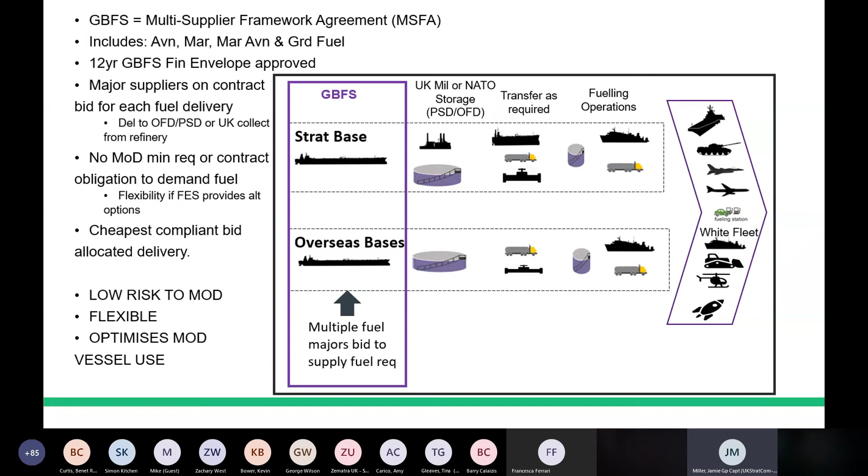If we switch to the next slide, many of you will remember the Defence Fuels Group and its disbandment around 2011-12. And on from that, we had the Defence Food and Fuel Services, of which I was a part as well many years ago. And then the realisation that really didn't work, in the sense of having a centralised place for fuels policy, governance and adherence.

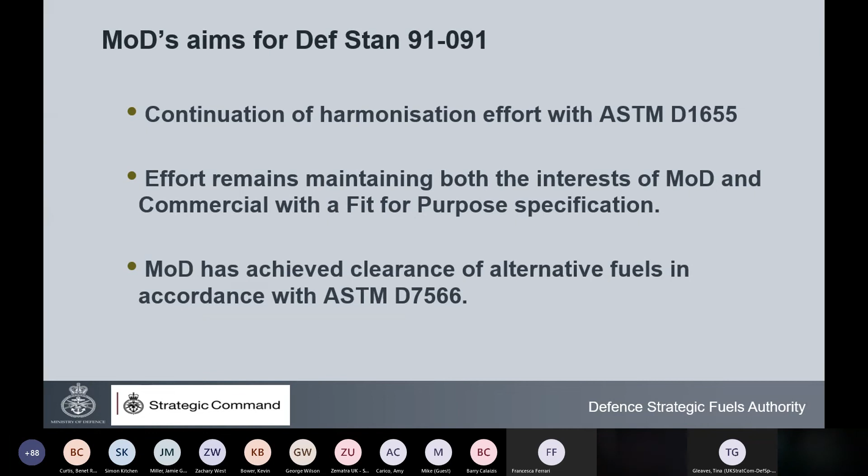Next slide, please, Francesca. The current status is issue 12 was published internally 14th of September and externally 18th of September, and this includes a 3-month implementation period. It's available on the DSTAN website, which you need to go through the Defence Gateway to get, but I know they've been having issues and people haven't been able to get hold of it. If you have problems, just email me and I'll quite happily send you a copy. Next slide, please.

As I've already mentioned, our biggest achievement is the clearance of alternative fuel blends, and so that's necessitated the removal of Annex B1, which restricted the supply to MoD. In line with this achievement, the global bulk fuel supply contract is in progress at the moment. It's to be awarded this month. Notice of award was issued 7th of October. There's a 10-day standstill period, so the award contract will be made on the 19th to the 21st of October, and this is subject to internal approvals. Next slide, please.

The particle counting limits have been added to table 1, and this has been added as an alternative method to gravimetric, so either can be done. Next slide, please.

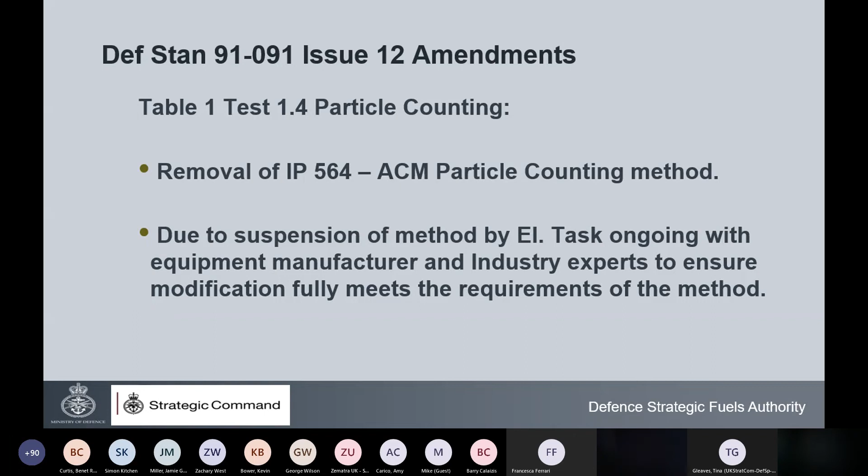In conjunction with the particle counting limits, we've removed IP 564 ACM particle counting method, and that was due to the suspension of the method by the EI. There is a task with the equipment manufacturer and industry experts to ensure that the modification fully meets the requirements of the method. So potentially that can be reinstated in issue 13. Next slide, please.

To do with particle counting, we've inserted a guidance note for test results that exceed the limits and for unsatisfactory results in the presence of water. We've also inserted this note into Annex E, Table 5, Note 1. Next slide, please.

Going on to a different subject apart from particle counting, the ASTM D3241 aromatic dye issue. Table 1, Note 5 has been amended to read that batch numbers greater than 983 are suitable for use and yield comparable results with batches prior to 975.

Next slide, please. The other minor amendments are Annex A 2.6 antioxidants, so the reporting requirements have been simplified. Annex B 4.1 co-processing, minor rewording to align with ASTM D1655. Annex C 4.1 FAME carryover statement, minor rewording. Next slide, please.

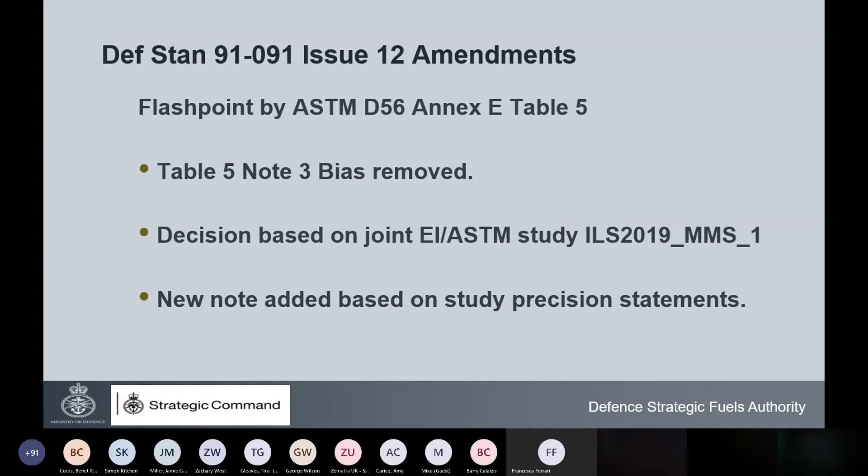Flashpoint ASTM D56, this is the Flashpoint method with the bias. Annex E Table 5, due to the joint EI/ASTM study ILS 2019_MMS_1, due to the outcome of that and the study precision statements, the bias note has been removed. Next slide, please.

Annex F, additional information on fuel properties. F 1.2, this has been enhanced to acknowledge that fuel storage and distribution can unintentionally accumulate elevated levels of particulate. Therefore, additional handling procedures such as extended settling and filtration will be required prior to the point of delivery to the aircraft. Next slide, please.

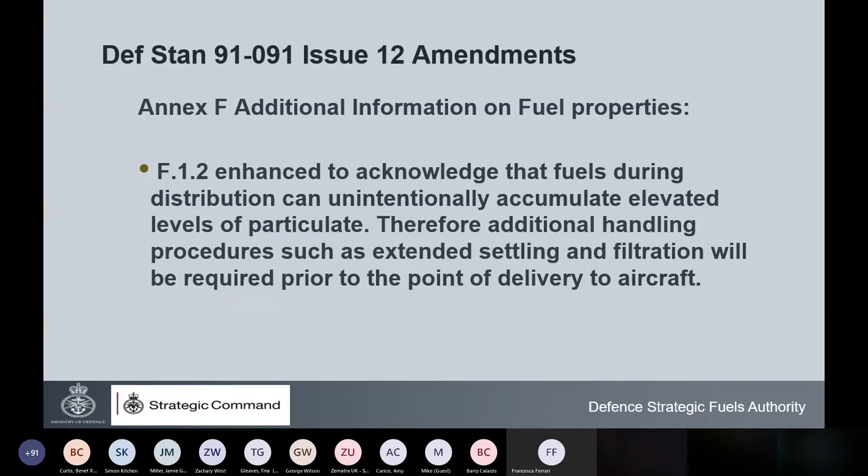Annex F, which is F.4, Saybolt color. There's been a minor change in that to read F4.2, changes in Saybolt color amended to reduction in color, in both the test and the chart on that section.

Next slide, please. So looking ahead to draft issue 13 proposals, conductivity SDA has been raised. Is it safe or reasonable to reduce the minimum requirement down to 25?

Thermal stability automatic tube raters, should there be a referee method? There's a lot of activity on this at the moment with ASTM and the task force, so we're all waiting for the outcome of that. Water separation test methods: there are two new ones up for consideration for inclusion in issue 13, ASTM D7224 MSEP and ASTM D8073 WSI.

We've also been in conversation with the manufacturer of Tolad 351 lubricity additive. That's no longer supported by them, and so they've registered it to become obsolete.

Next slide, please. So we're inviting questions and comments for amendments to issue 13. If you've got any, please feel free to submit them to me and I can take them through Exco.

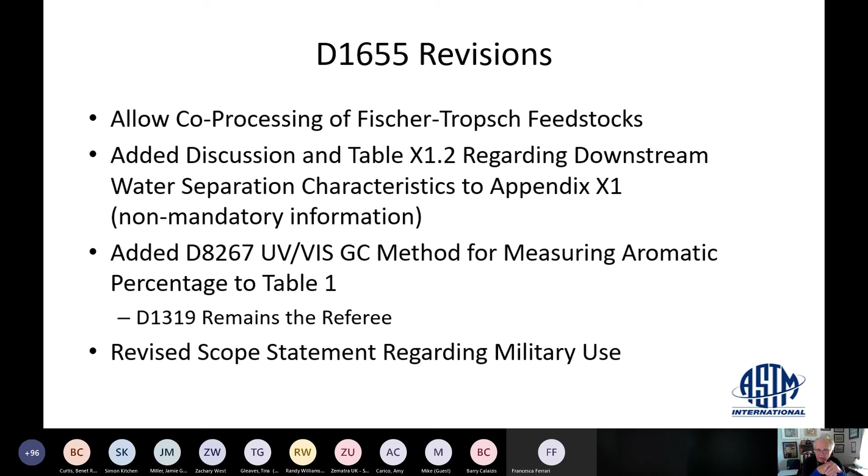Francesca, next slide, please. Oh, no, I'm sorry, go back. I was looking at my page, sorry. I've got one to my side so I can see from my right eye because I'm right-eyed.

Now the next slide, please. Thank you, Francesca.

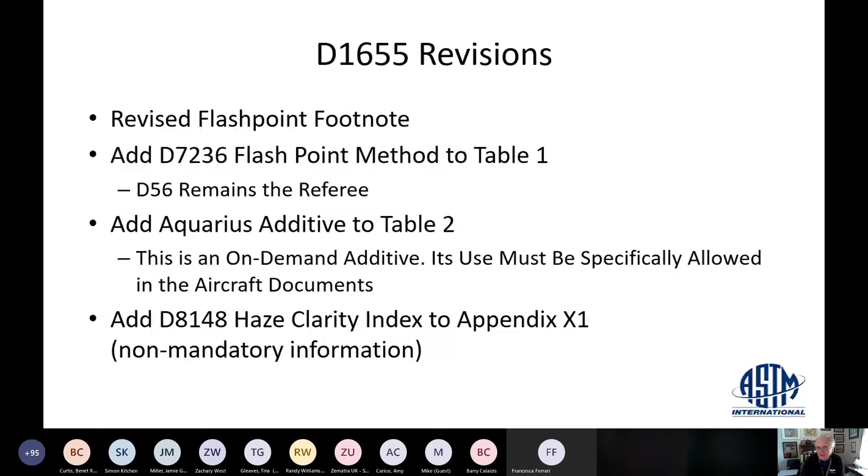Other things that are going on: Section 2 of gasoline diesel reciprocating engines continues working on unleaded gasoline standards. I think progress has probably been delayed a little bit because of the aviation recession this year, but I know they keep working on it.

Thermal stability and combustion characteristics: there's continued progress on updating D3241. Probably the biggest, most dramatic change is that gear pump JFTOTs are no longer allowed in the standard, either in 3241, and by extension they're not allowed in 1655 either.

A coordinated effort with EI will result in a revised IP 323, and you can talk to Gary Ricard about how that's going to come around.

On additives and electrical characteristics, there's continued work on revising D4054 to make it clear how the process works.

In section 5 on fuel cleanliness, through a concerted industry effort we were able to get D5452 revised and keep it from falling off the edge at the end of the year. The final draft is in progress right now, and we expect it to be published shortly as 5452-20.

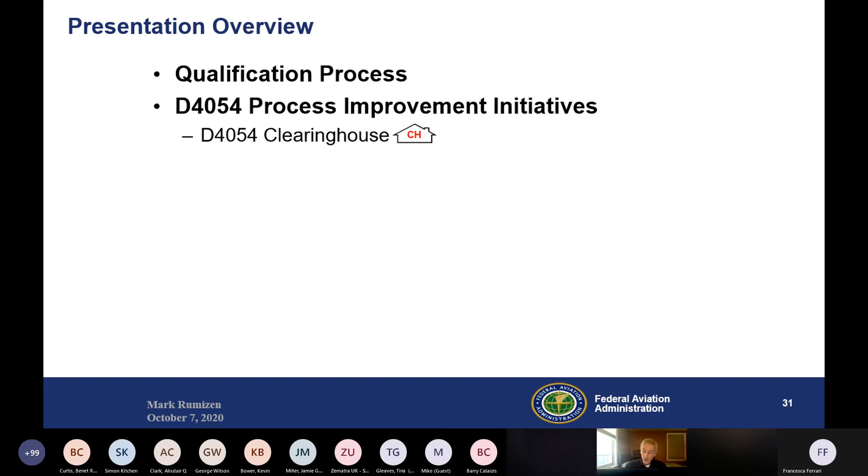Thank you, Mike. Good afternoon, everybody. Good morning. Hopefully I'll get through this in a reasonable amount of time; for some reason the animation always seems to take longer than I anticipate. But I'm going to give an overview of what we're doing relative to alternative jet fuels and ASTM. I'm going to give an overview of the qualification process, followed by talking about a couple of D4054 process improvement initiatives, the clearinghouse — and that's the icon that's going to go with the clearinghouse, keep your eye on that and remember it — and the Fast Track Annex, with its own icon.

And then talk about alternative jet fuel pre-screening, which is something new. And finally, talking about the National Jet Fuel Combustion Program, integration into D4054. And then I'm going to provide a status of the pathways that are in process and those that have been approved.

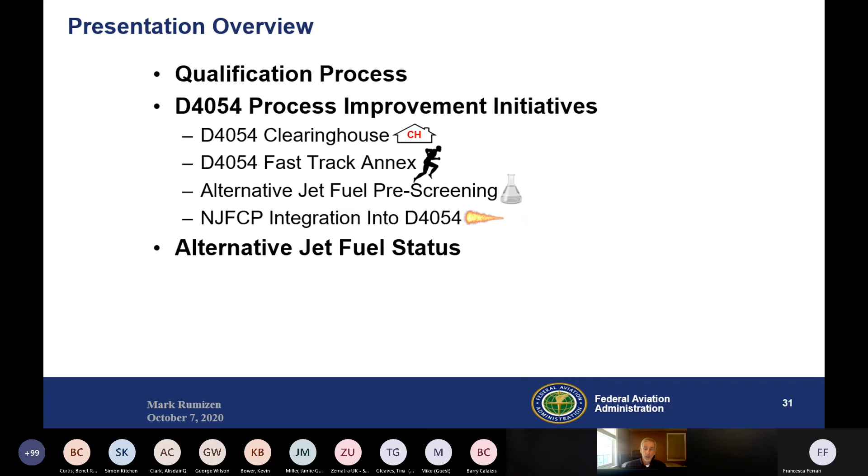So this is a one-chart overview of the whole process we undertake through ASTM to approve for use alternative jet fuels in basically virtually all aircraft. It's based on the fact that virtually all aircraft are required under airworthiness regulations to establish an operating limitation for jet fuel or aviation fuel. And virtually all aircraft define Jet A and Jet A1 as the fuel they need to use, typically defined in terms of specifications, ASTM D1655 or DEFSTAN 91091.

And at ASTM, we developed a guide or practice, D4054, to basically compare a candidate alternative jet fuel with conventional jet fuel made from petroleum. And if the result of this comparison is that the new alternative jet fuel has the same performance and properties as conventional jet fuel, we balloted at ASTM and added it to our drop-in fuel spec, which is D7566.

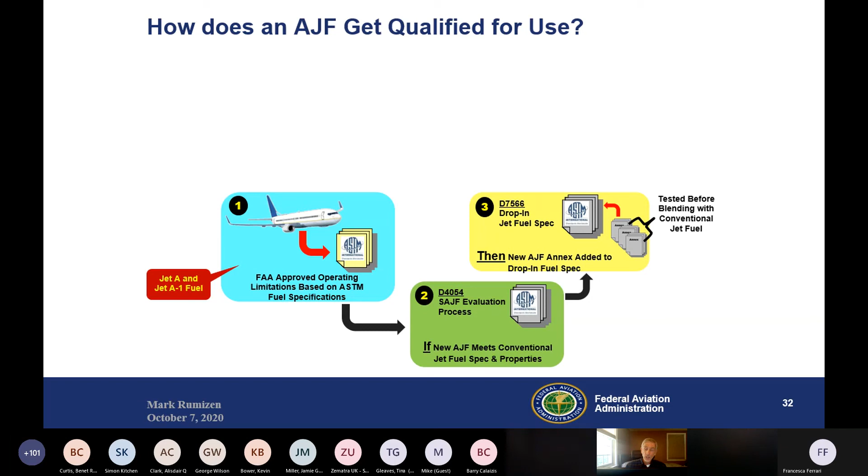Each of the alternative jet fuels is added as an annex. That's the way we've been doing it. The reason for that is they all have to be blended with some percentage of conventional jet fuel, between 50 and 90%, to have a complete, what we'd call sustainable aviation fuel. So it's not 100% sustainable, it would be some percentage sustainable.

And so it's only a drop-in fuel after blending. That's an important point. So the final step is that because all these fuels that we've added to D7566 are drop-in fuels, they are essentially equivalent or identical to petroleum-derived jet fuel. So because of that, we can conclude that the new alternative jet fuels meet the existing operating limitations for Jet A and Jet A1, so they can be used without any regulatory approval.

So the ASTM process, in effect, is a process to show that the new alternative jet fuel is the same as the existing fuel. It's the same fuel, it's not a different fuel. And what that means is that having the alternative jet fuel added to an ASTM specification equals approval to fly.

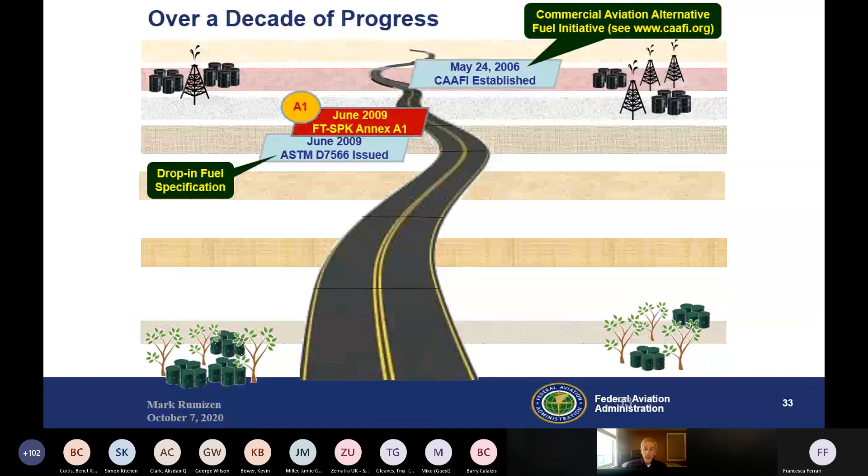So I'm going to go through this chart quickly. We started all this back in 2006 with CAAFI, the Commercial Aviation Alternative Fuel Initiative. You should go see that website, we have a ton of information on what's going on with alternative jet fuels and sustainable aviation fuels. And we issued the drop-in fuel spec in 2009. The first annex was included with that spec, Annex A1, and that was Fischer-Tropsch.

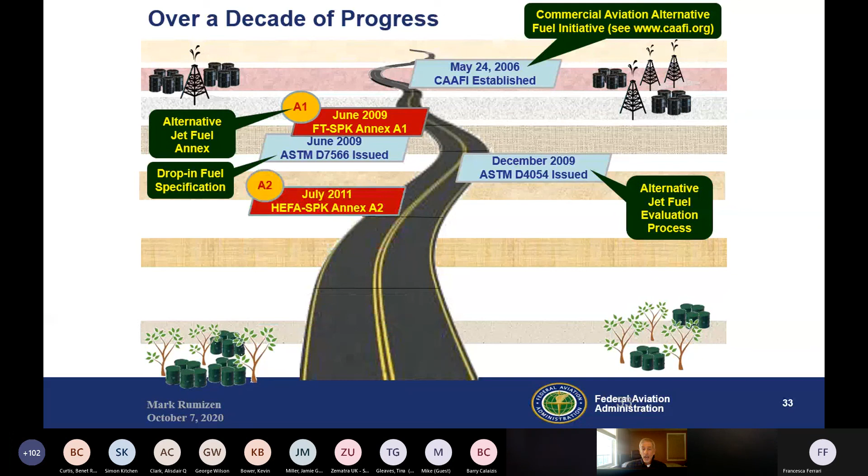Our evaluation process or qualification process, D4054, was issued the same year, 2009. And since that time, we've progressively added additional annexes to the drop-in fuel spec, D7566. So there's been a regular progression. Annex A5 was initially approved just with isobutanol as a feedstock for alcohol to jet. Two years later, we added ethanol as a feedstock. And more recently, just this past December, we added CHJ, catalytic hydrothermolysis jet, as Annex A6.

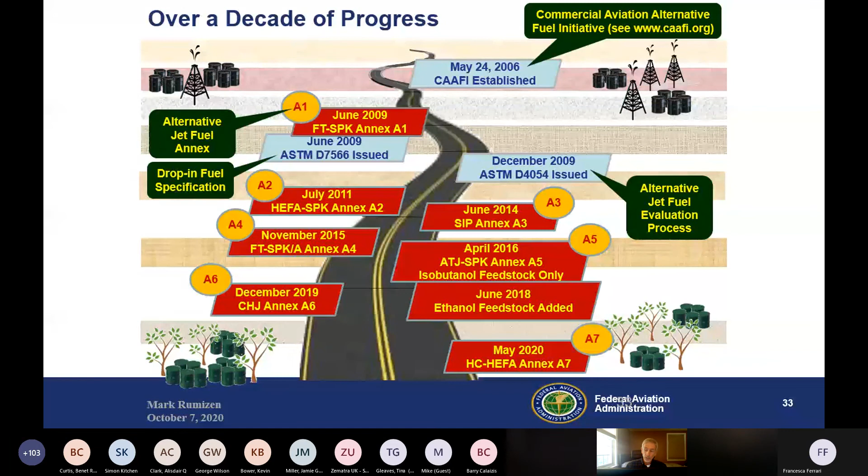And then we added a version of HEFA that includes hydrocarbons along with triglycerides or lipids as part of the feedstock. That was Annex A7, added in May. So again, you can see a regular progression over the last 14 years, and when we get later in the presentation, I'll show you — hopefully we can keep this going.

The first process improvement I'm going to talk about is the clearinghouse. Effectively, this is one-stop shopping, that's the idea. When we started evaluating these fuels at ASTM, the new fuel producer was faced with running around ASTM meetings, grabbing as many people as they could and asking how to test things, where to test things. So we tried to consolidate everything under FAA funding in this clearinghouse.

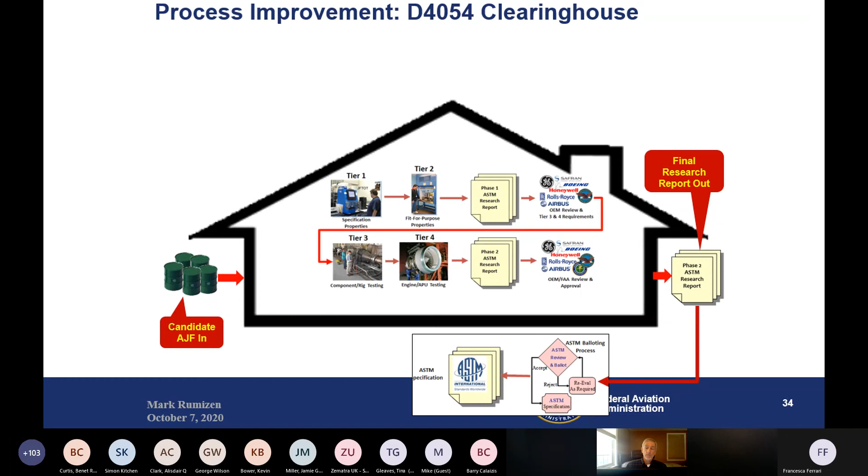So the idea is that a candidate alternative jet fuel producer would provide a certain amount of fuel, 100 gallons is what we look for initially, to the clearinghouse. The clearinghouse would do all the work in terms of coordinating the testing, funding a lot of it, not necessarily all of it, and coordinate the reviews with the OEMs and the FAA. When all that's done, a research report would come out that's ready for ASTM balloting. So the clearinghouse is run out of the University of Dayton Research Institute, UDRI.

Zabarnick is the guy you should contact if you want to get information on how to get started on the process.

The FAA is funding it under a Center of Excellence program we have called ASCENT. That means we fund 50% of all the activity, so it's under a cost share, and industry has to fund the other 50%. But because it costs so much to develop these fuels, meeting the cost share typically isn't a challenge. Ideally, other entities with a real interest in improving these alternative jet fuels, for example to meet carbon emission goals, could contribute to the clearinghouse to help facilitate the evaluation and approval of these fuels.

That's the icon, the little house with the CH in it, so keep your eye on it. I'll use it later on.

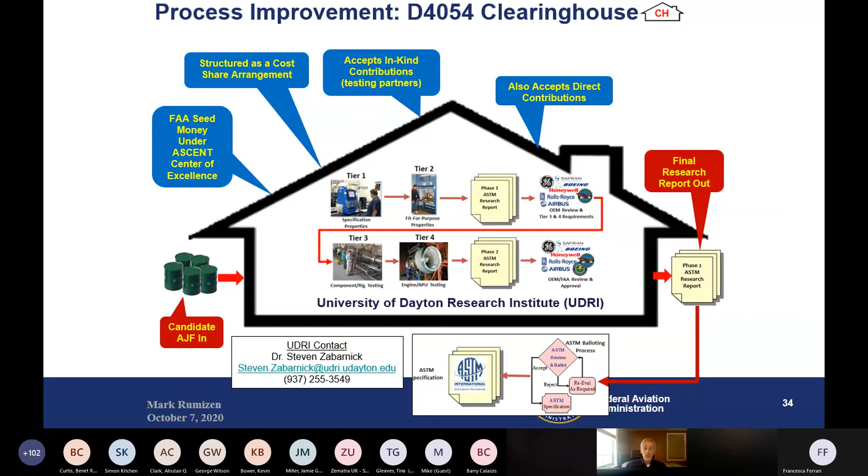D4054 Fast Track is basically an accelerated, light testing program that under certain circumstances we allow fuels to go through. It's pretty much fuel property testing along with in-depth fuel compositional analysis that's primarily the only thing we require under the fast track. And you only go through one review process with the OEMs, not two phases.

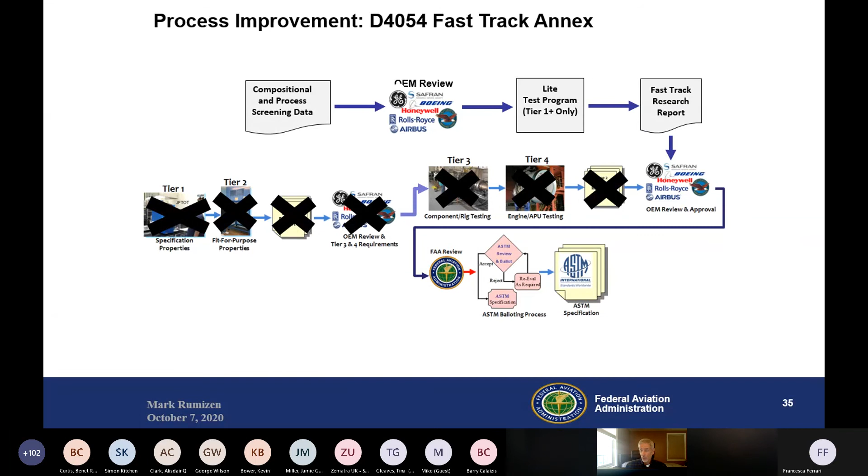However, in order to use the fast track, two conditions have to be met. First, it's only for alternative jet fuels with hydrocarbon compositions that look very much like a conventional jet fuel. That means a well-distributed hydrocarbon distribution between C8 and C16, with other target values in the fast track annex in D4054 indicating what we consider conventional. Another way to look at it is that it's a much more narrowly defined alternative jet fuel, one we want dead center, not on the outlier of the properties or composition of conventional jet fuel, very closely defined.

Also, once a fuel is approved under this process, it's only limited to a 10% blend percentage, regardless of the physical properties. You may be able to blend it to a higher percentage, but because we approved it under this light testing program, we're limited to 10% blend concentration.

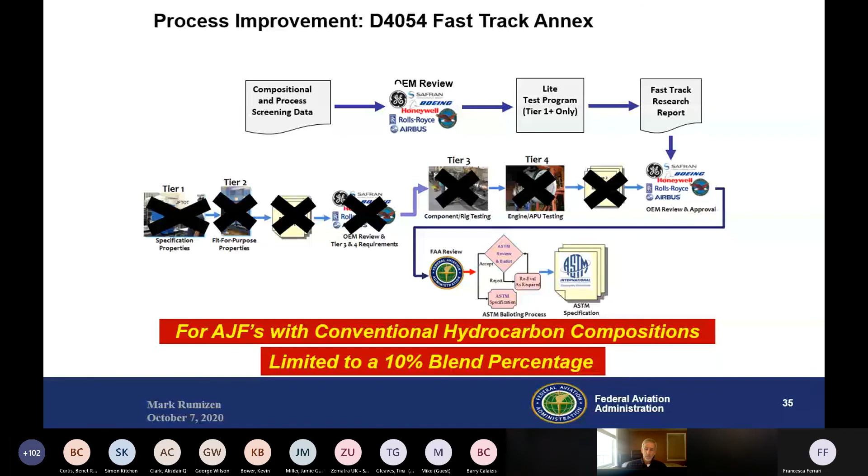And that's the icon for the fast track annex.

The next process improvement initiative we've just started introducing is called pre-screening. The D4054 process I just went over, that bracket, should encompass the whole graphic on the bottom. It was intended for candidate fuel producers who'd gone through the experimental phase, locked in their conversion pathway and composition, and are ready to come to ASTM.

They're ready to scale it up, maybe from pilot scale to demo scale, to make enough fuel to support the ASTM evaluation. We coordinate that through our CAAFI Cert-Qual team, which I lead. So it's a more mature candidate fuel when it's ready for D4054.

We looked at it and thought there needs to be some guidance to candidate fuel producers earlier in the process, when they're dealing with lab scale experimentation, to help them refine their catalyst and conversion process to result in a final composition or fuel properties that's going to make it easier and more conducive to getting through the D4054 process.

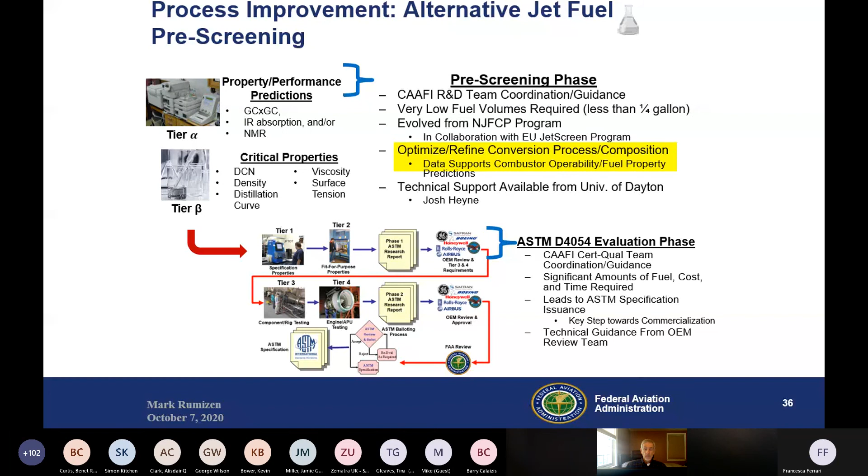And that's the icon for the process improvement.

National Jet Fuel Combustion Program was started back in 2014 or 2015. The idea was to study the impact that different fuel compositions have on combustor operability.

The reason for that is, as you can see in the graphic, Tier 3 and Tier 4 testing, where you might go through combustor rig testing and/or engine testing, maybe even flight testing, involves spending a lot of money making a lot of fuel to support that. So if there's a shift in the composition of the alternative jet fuel from what we consider typical petroleum-derived, conventional jet fuel, the OEMs are going to want to see testing on combustor rigs and engines to make sure there's nothing unusual relative to combustor operability.

Under the National Jet Fuel Combustion Program, a referee rig was developed that requires less fuel, combined with a few other tests, shock tube and spray rig. The idea is that you can spend less money, use less fuel, and verify there are no concerns with combustor operability. So we're trying this out with one company right now going through D4054. They're also going to conduct some of the National Jet Fuel Combustion Program tests, the referee testing and other testing.

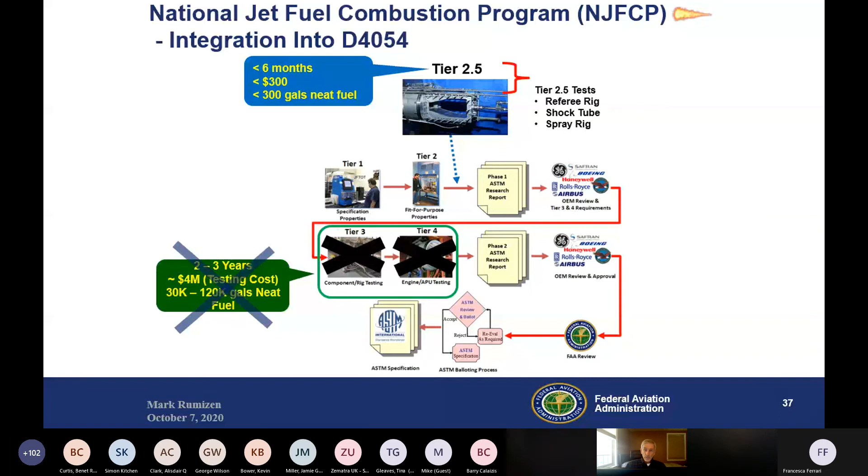And there it is, there's the icon for the National Jet Fuel Combustion Program. Getting to the final slide, here's the status. So the D4054 process in this chart starts on the left side, goes to the middle, then jumps up to the top, goes across to the right side of the slide, and then drops down to the final ASTM balloting and issuance of annexes in D7566.

So with this status, we're going to work backwards. Here are the 7 annexes that have been approved and have gone through this whole entire process.

Right now, Virent synthesized aromatic kerosene, a purely aromatic stream, has gone through phase 1 and done some Tier 3 and Tier 4 testing. The data is being put into another report. Virent went through some corporate reorganizations, it's now been purchased by another company again, so they're going through corporate reorganization. There's been a couple of reasons why things have slowed down, along with the pandemic, which pretty much slowed everything down. But they're still considered active with SAK.

Green diesel, which we're calling HFP HEFA, high freeze point HEFA, and Shell IH squared, have produced research reports, and with HFP HEFA, the OEMs are currently reviewing that research report. We decided to give the OEMs more time to review it because of the pandemic. That was very nice of us, and the OEMs were very appreciative. But they're currently reviewing HFP HEFA.

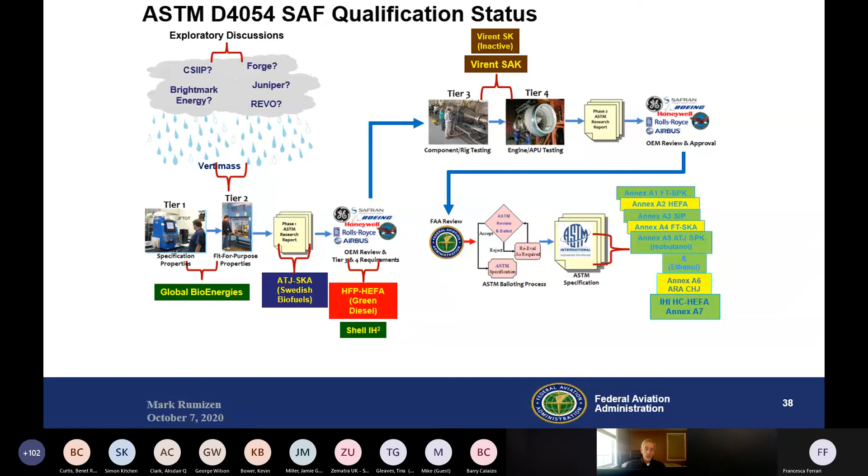So for the exploratory fuels, Vertimass is almost ready to do Tier 1 testing. And you'll see the icons on the process improvements, we're actually implementing those with the companies that are working on testing, where you see several companies taking advantage of the Clearinghouse. IHI took advantage of Fast Track.

And newer companies will take advantage of pre-screening. And that concludes my presentation. Thank you for listening. I'm sorry it took a little longer than it should have.

So this chart speaks for itself. I don't really have to say anything. It's grim. If you look back, if anyone was working in aviation or financial markets in 2009, you'll remember that. That wasn't a great time.

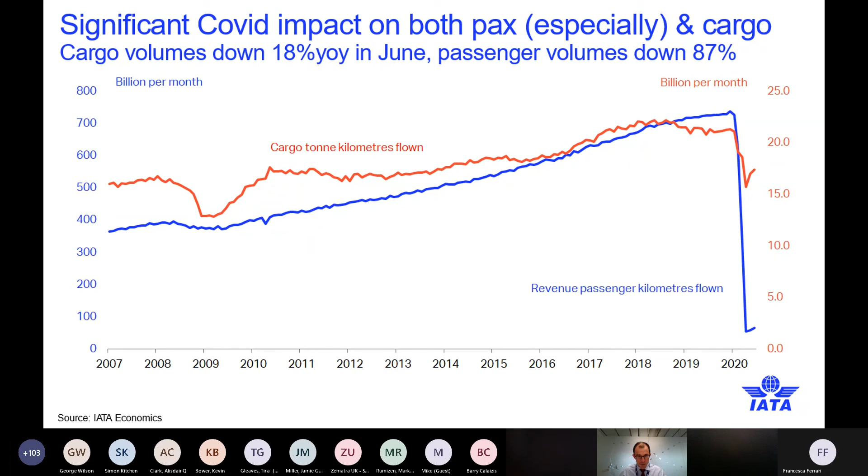But the 2020 cliff there, so we know that it's not good. And perhaps what's interesting to think about is, well, what does the recovery look like? And this does have some policy implications, which is partly why I show this. And different to some previous shocks that the industry has had, where often we see more of an aggressive V recovery, we're thinking this is more 2024, 2025 before we even return to the sort of levels that we were at.

So we're talking a structural hit to our industry. Again, I know for many of you I'm stating the obvious, but one of the numbers that hits me hard is when we look at the losses the industry is racking up here, in nominal terms over the next two years, this year and next year, in terms of our forecasts, we're estimating that half of all the nominal profits since World War II, that's in excess of $100 billion. So yes, there's a bit of an accounting trick there with nominal numbers, but they're big numbers indeed. Next slide, please.

So that's the doom and gloom out of the way. Really what I wanted to say is that IATA is governed by the CEOs, the board, a small group that makes the strategic decisions there. And one of the first things they came together and decided was a declaration. If you see the one I've highlighted in yellow, I'm very pleased to say that was substantial enough to make it into the declaration, and it speaks for itself that aviation basically won't turn its back on its environmental targets. COVID could have been an easy excuse to do so, but I can say with absolute frankness that is simply not happening in the industry despite the challenges. So next, please.

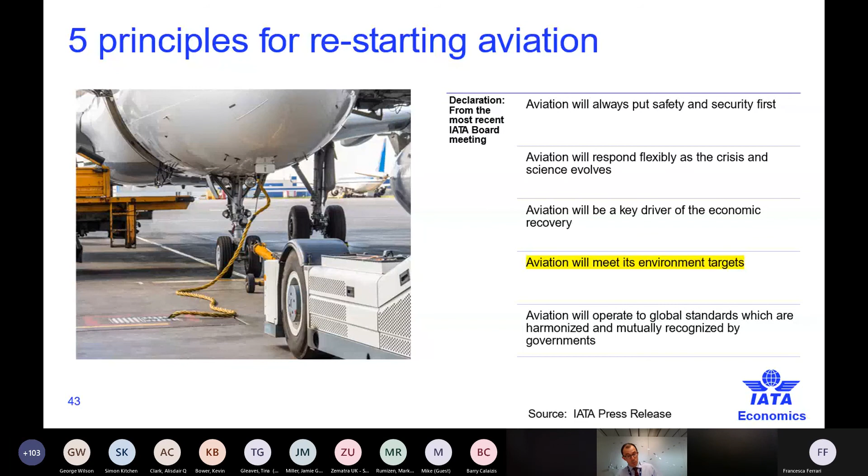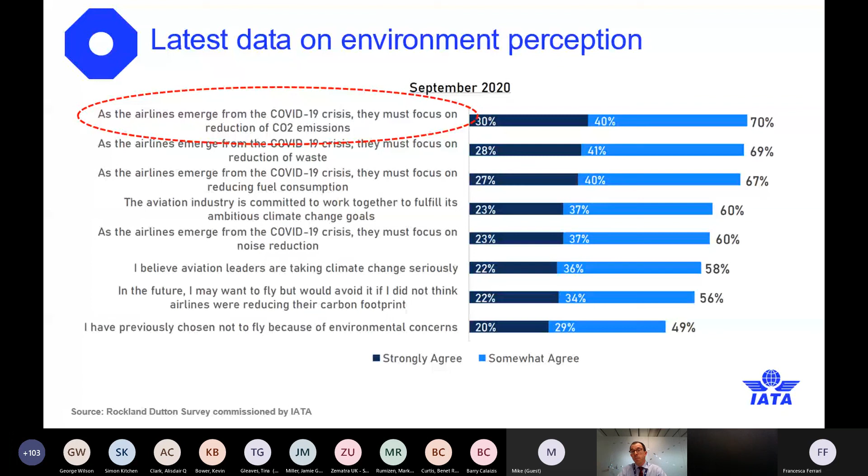So we look at all sorts of things, and this is not exclusive, but I don't think anyone has seen this. This is information we just released in our advisory council meeting only a day or two ago. So it's looking at some of the environmental perceptions of what the travelling public think, and it doesn't actually surprise me, but it still remains one of the top issues for travellers, that airlines focusing on their CO2 emissions is a significant thing on people's minds. So that's interesting information to continue to get and important. So next slide.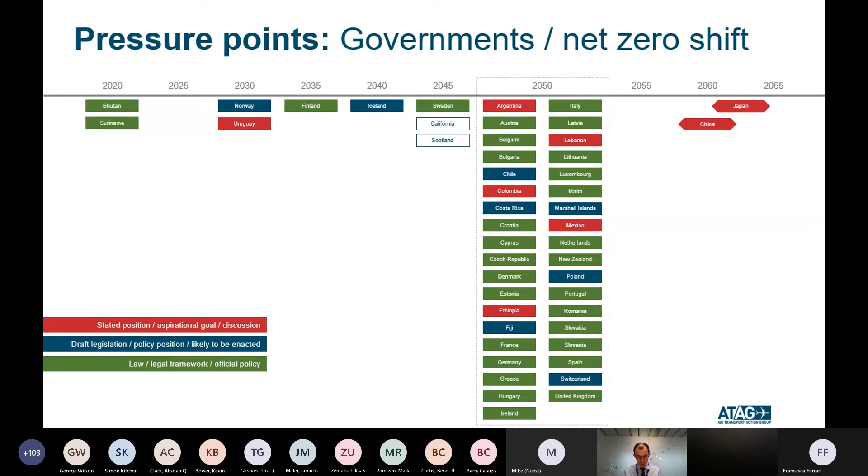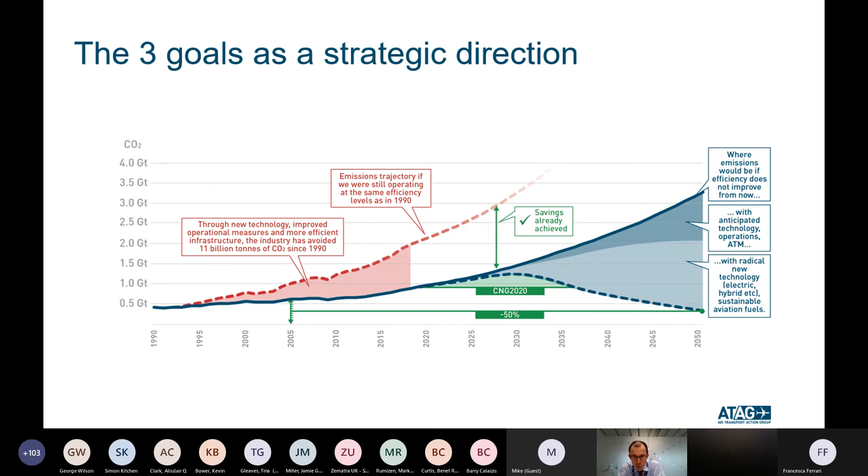The Corsia bit is pretty easy to visualize - that's the little hemisphere, I'll reference that in a minute. But longer term, as that chart moves out, we ideally want to follow the dotted line down towards 2050, where there's half a gigaton of CO2, actually down to 325 million tonnes. But without any action, the line continues to follow that heavy blue line. So increasingly there's relevance and importance in understanding how we achieve that gap between where the heavy blue line is going and where the dotted line needs to go.

The baseline should have been calculated as an average of industry emissions in 2019 and 2020. But thinking back to my first slide, using 2020 is a complete black swan event for industry emissions. Using that average would have taken it back to something like carbon neutral growth 2012 or 2013. Environmentalists may have celebrated that, and the industry doesn't shy away from additional ambition, but I'd highlight that these agreements struck at the international ICAO level are political agreements - difficult to reach at a whole-of-world level. If you tinker with it to this degree, these things can become very fragile. That's really why we're now at carbon neutral growth 2019.

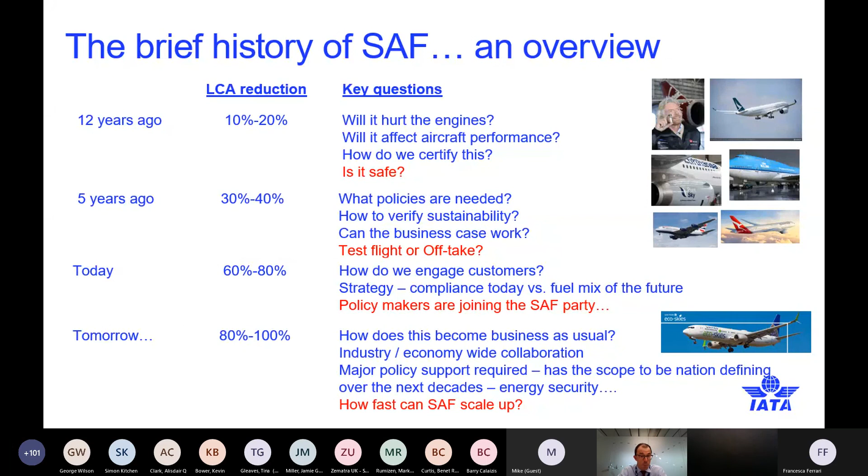Again, on the stats, I just throw that in there as a refresh. You've perhaps seen this one, but there's plenty of flights. We know how to do this. There aren't those questions about feedstock or technical compliance. We can do it. Fuel produced today is impressive, it's come from nothing to something very quickly, but there's still a very long way to go to get significant CO2 reductions. But we have had many airlines, either using this in a demonstration sense or early stage sense, or even committing to offtake agreements, which is helping some of these facilities get the capital to develop.

So I just wanted to spend a few minutes talking about some of the policy issues going on. Waypoint 2050 is an industry-wide piece of analysis where we've sought to more granularly understand what different scenarios could look like to go from where we are today to achieving our 2050 target, looking at the contribution from each pillar of improvement available to us. I'll then give a brief insight on the airline view of the Green Deal, which is Refuel EU, and then the long-term aspirational goal discussions happening in ICAO.

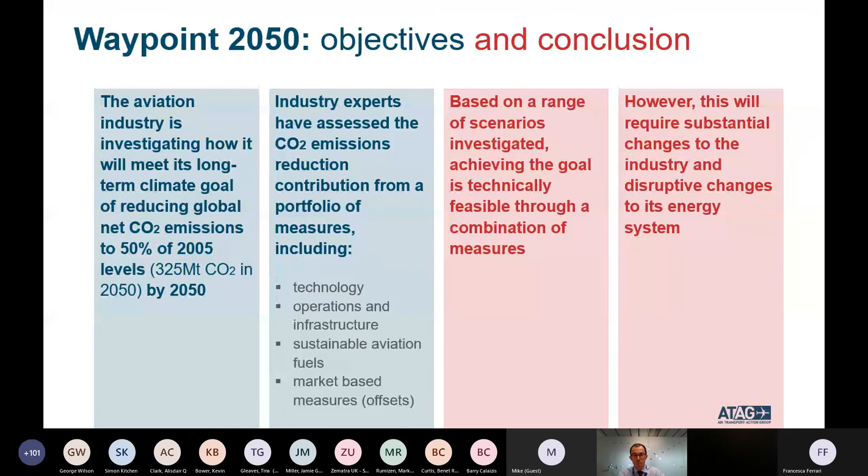The key was to take a thorough, careful look with the right experts at what contribution technology can play, what the ranges would be, how much more can come from operations and infrastructure, and what those ranges might be. Then particularly getting a sense of orders of magnitude of SAF and how much we would need. Most of the SAF analysis has not been in a pure forecasting sense, it's more been backcasting - looking at the other pillars we have available to make the best predictions on CO2 reduction achievement, and then looking at what would be needed from SAF to get to where we need to go. And if there are still gaps, beyond the technical limitation of SAF from either a feedstock or approvals point of view, then can offsets play a role as well?

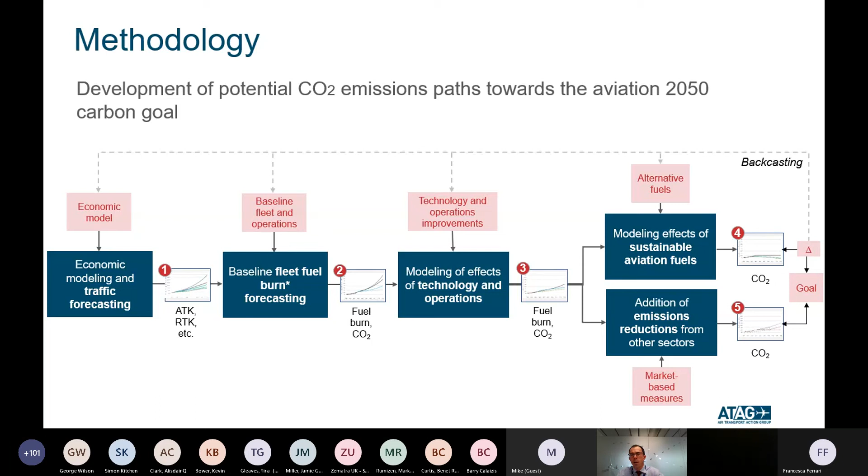This is the methodology, more or less what I just described. Sequentially, traffic forecasting, then fuel burn estimates, then looking at the different improvements available, and then looking at what gap still needs to be made up from sustainable aviation fuels, and finally, is there more from out-of-sector things such as offsets?

This is pretty high level, but I think this is the best we can do today - a schematic of the thinking, really the thinking around how we approach this. You can see there are five different options here from forecast, technology, operations, etc., and you get a range of scenarios within that - from what's happening today to, as you can see, aggressive CO2 reductions, aggressive SAF, etc. You get a whole range of different scenarios. There is a more detailed report for those with the desire to dive into this - it's actually just been released.

This is what I want to show - distilling 100 pages into one slide for the purpose of this group. The three lines heading up into the sky are the more aggressive SAF scenarios. If you look on the y-axis, you see quantities around 300 billion, 350, even up towards 450 billion litres. That's more fuel than we're actually using as an industry today. So that gives a sense of the magnitude of volumes required if SAF is to play this large role in achieving significant emissions reductions on a pathway to the 2050 target.

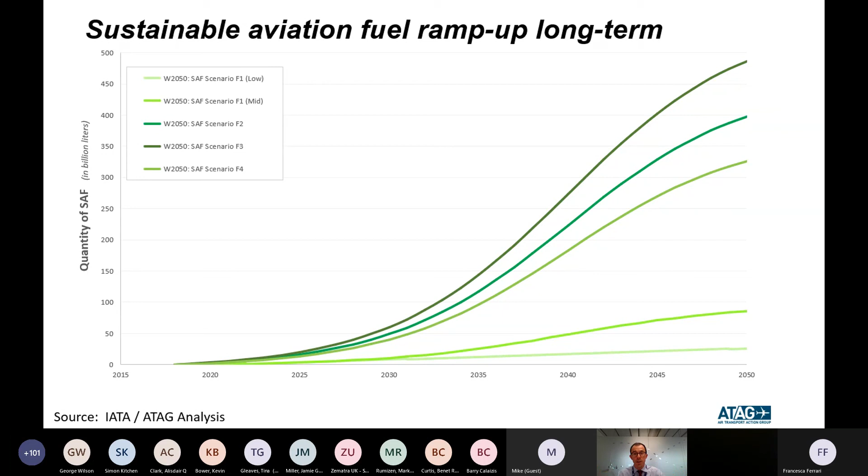The lower lines are more of a current trend - I think we're very early days in the development of SAF, but that was more an extrapolation of the current trends we're on. It's an interesting question it raises: how do we fill that difference between the current trends and where we would need to be? And then there's the big question of what policies would be required to make that happen.

There's a specific focus on aviation here. That's been a shift in policy, I would say, from the Commission in recent years. They really understand aviation, in a sense, as being a very hard to decarbonise sector and needing specific policy support. So there's a range of policies being put on the table.

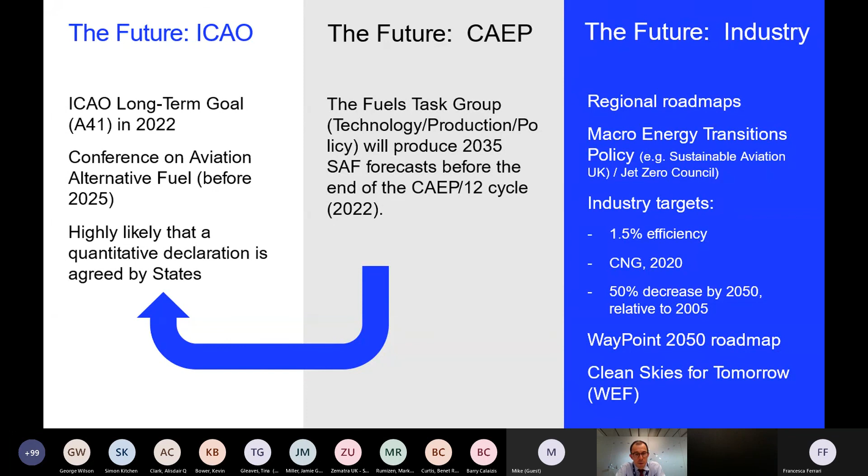So just to the last slide, just to leave you with a bit of food for thought. I sometimes use this from the advocacy standpoint when we're talking to policymakers, which is really, we do need policy support. We want it to be for a finite period of time, though, where, under certain assumptions, we do believe that you can get to some competitiveness as we get into an increasing carbon cost environment, but also getting some economies of scale with starting to really accelerate the development of SAF. And I think it's feasible before 2040, and that's in a realistic sense.

So I know I've given you a really quick overview of my thoughts there, but there's a lot more detail in some of these reports, which I'm happy to share offline, or answer a few questions now if you've got time.

Well, thank you very much, Robert. That's a terrific overview, and it sort of can't help but feel it makes the technical problem seem relatively simple compared to the political one. But there is only one question, and I'm going to again ask if you could take it offline. You'll see it on the list at the side from Chris Lewis. But we're 5 minutes over time at the moment, and I don't get my bonus if we're late finishing. So I'm going to try and keep it on track. And we've got some really good presentations coming up, so I don't want to make life hard for them. We're going to move away from the world of SAF and into a more realistic, a more immediate problem, and that's the world of SAP.

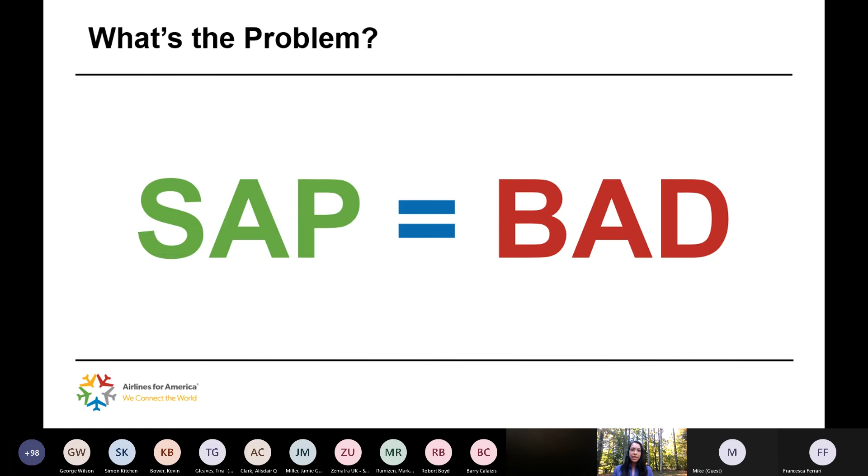Next slide. So I just wanted to take a moment, although this is a presentation on some of the upcoming technologies, or the hopefully future technologies, I did want to highlight the bulletins that have been put out by A4A and JIG with these sort of mitigating steps for continuing to use filter monitors in the interim. So there are a number of steps that need to be taken in order to reduce the risk as low as possible for that SAP to leave the filter. And so these are really critical steps that, even if you're not following the JIG or the 103 standard, need to be followed, and airlines need to be following up with their fuel providers to make sure that these steps are absolutely being followed. This is to improve safety here.

Next slide. So I did just want to highlight, we have a little bit of data here. It's not from a large sample size, relatively speaking, but we had this 2007 study that was done under the umbrella of IATA, where we had only about 67 service engine fuel filters that were returned. They were tested for presence of SAP, and approximately 80% of those were found to have SAP.

Most recently, again a limited sample size here, but approximately 50 fuel filters were tested. 2% were found to be positive for SAP.

These are obviously not absolute numbers because it's not a large sample size, but it does give us some indication that the mitigating steps I highlighted on the previous slide are having some effect in terms of reducing the risk of an SAP migration event. But I still want to emphasize, in the green text, SAP is still bad. We still need to get rid of filter monitors, and that's not going to change. We're just maybe in a slightly better place than before, but we need to move forward without SAP technology.

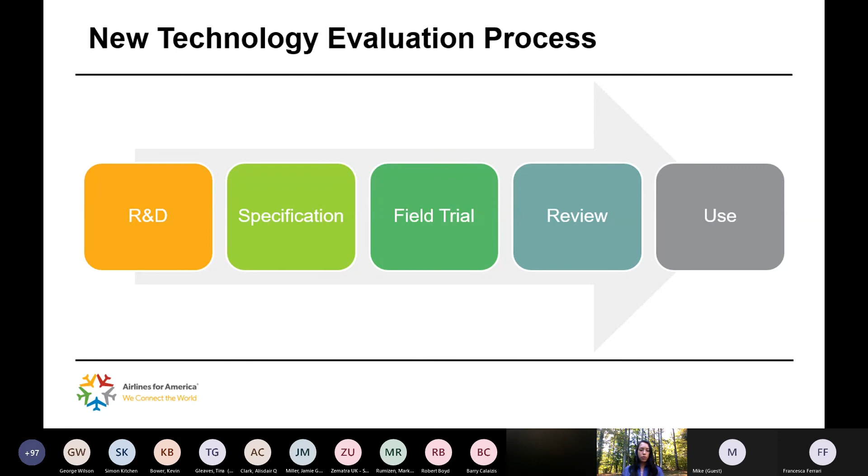Next slide. All right, let's take a look at some of the possible replacement technologies that are either already in the marketplace or are coming to the marketplace, we hope, in the near term. Next slide.

So the first one is a filter water separator. It's a tried and true technology, been around almost forever it feels like, already approved in every single operating standard that exists around the world. It's a known technology, we know how to use it, we know how it operates in the field. It now comes in a much smaller format, a 2-inch format, which means it can fit in a much smaller diameter, making it more adept for mobile and into-plane applications.

It's a technology that's operationally familiar, so users understand how it works, what its limitations are, and so on. It does remove both dirt and water, which is great. It does have a couple of limitations that we manage in the field day-to-day. It can be disarmed by surfactants, but that's something we're aware of and have been learning how to manage as the years have progressed.

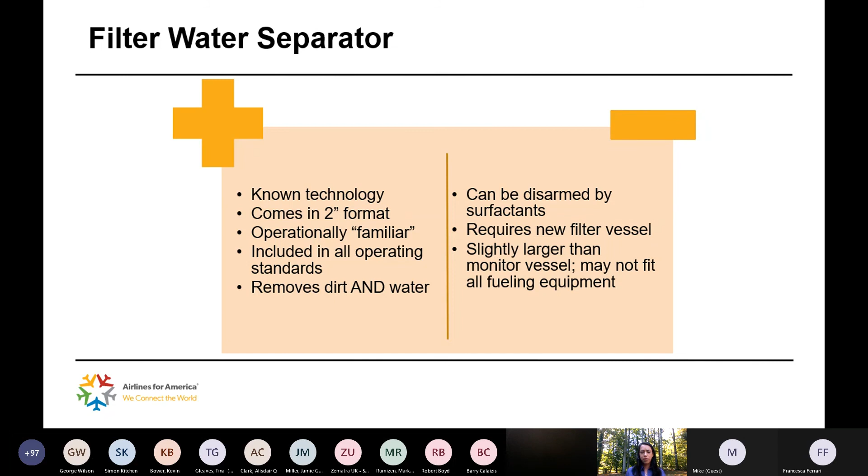In fact, the newest technologies for filter water separators are quite good and robust. If you wanted to switch from a filter monitor to a filter water separator, it does require a brand new filter vessel, it would not fit into an existing filter monitor vessel. Even then, the vessel is slightly larger than a monitor vessel, so it may not fit on all refueling equipment, but it should fit on most. So this is a good option, it exists today, and it's approved in the standards. Next slide.

The next technology to potentially replace SAP filter monitors is the dirt defense filter with electronic water sensor system. It's a bit of a mouthful, but it's important we get both components together, it's a 2-component system. It has to have the dirt defense filter and the electronic water sensor to work as a full replacement for filter monitors. Without both components, it would not actually be a replacement for the monitor.

This is the first technology that was successfully field trialed. It went through a 12-month global field trial, had qualification and robustness testing from the EI before that, and went through a lot of work to prove itself to the marketplace. It does come in that 2-inch format, meaning it could drop into existing filter monitor vessels.

It does also fit in a 6-inch format as well, but I'm focusing a little bit on the 2-inch formats here because that's where the biggest need is in terms of replacing filter monitors. They fit into existing filter monitor vessels, which is great. You can just do a filter element change and drop them in.

It's already included in most operating standards as of August of this year. Note, not all, but most of the operating standards have included this technology now.

Based on the data collected during the global field trial, we believe the technology, the filters themselves, should last longer than you see with a filter water separator or a filter monitor. So you're going to get a longer element life, you're not going to have to do as many element changes, and you may have some potential cost savings on the filters themselves.

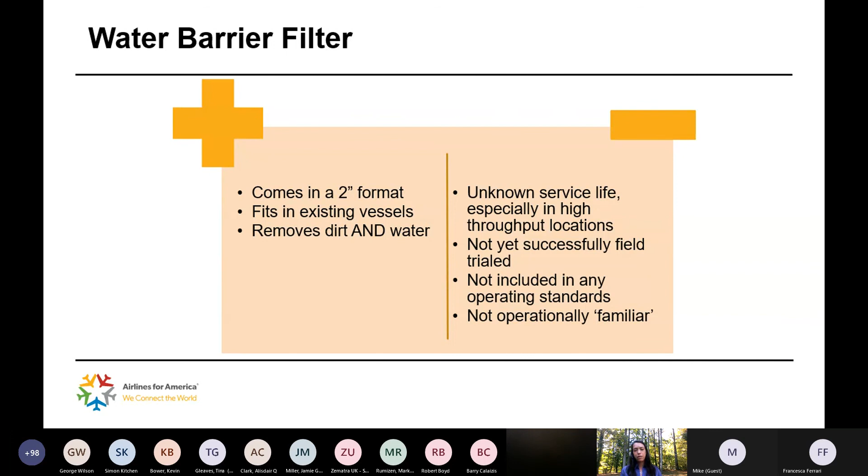So that leads to my next bullet: it's not currently in any operating standards, so there's no allowance for using this technology in any operating environments out there. The other thing is it's not operationally familiar - this technology has a little bit of a different behavior with differential pressure than typical and traditional filters we've seen before. That's also going to take a bit of a learning curve. Again, not very complicated, but it's just something users will have to make themselves familiar with in order to use the technology going forward.

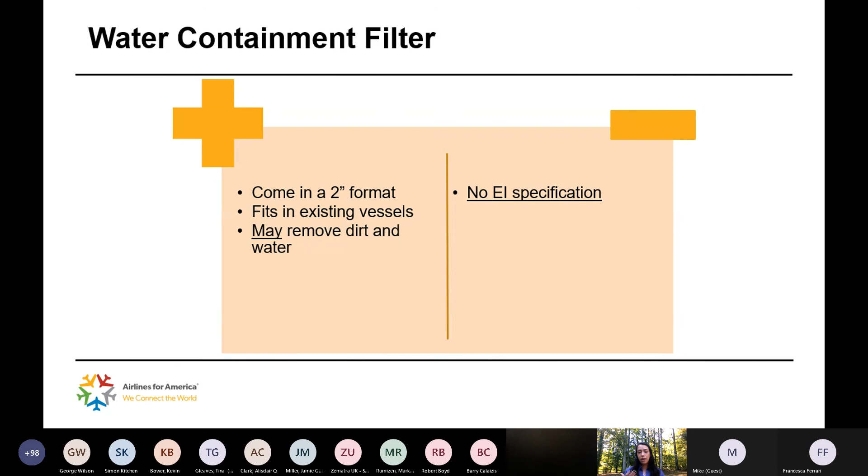Next slide. So the last technology we're going to talk about is the water containment filter. This technology hopefully will come in a 2-inch format, so may fit into existing filter vessels. It may remove dirt and water, and I want to emphasize the may, because there's no EI specification for this technology yet, which is the first step in getting a new filter included into the operating standards. So this technology, if it ever makes it, really has a long way to go, and it's unclear if it's ever going to get there. But this is another technology in advanced development at the moment, in discussion with the EI about potentially writing a specification.

Next slide. There are some other technologies out there that are in development, but we don't really have a lot of details on those. Hopefully, for the sake of the industry, we will see more technologies continue to be developed as replacements for these filter monitors. Next slide.

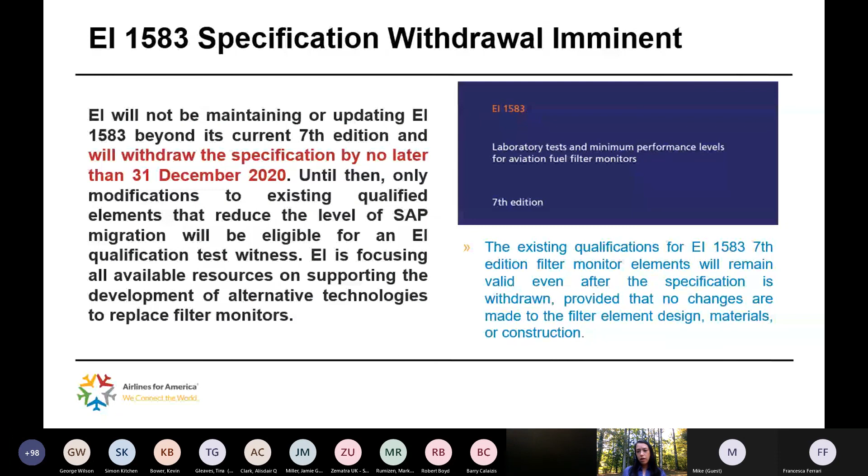I did want to address that at the end of this year, on 31st December, the EI will withdraw the 1583 specification. That means the specification for today's filter monitors will no longer be valid. But it's really important to distinguish that although the specification is going away, the existing qualifications for those 7th edition filter monitor elements would remain valid even after the EI withdraws the specification, as long as no changes are made to the filter design, materials, construction, et cetera. So the qualifications will remain valid after the end of this year, even though the specification will be withdrawn. Next slide.

I wanted to highlight that at the end of last year, both A4A and JIG came out with bulletins highlighting that for an interim period of time - and I want to stress interim - although the EI specification is going to be withdrawn, both of those operating standards are going to continue to list filter monitors as an acceptable into-plane filtration technology as we continue to evaluate those alternatives.

Next slide. But it's really important to note this is just an interim decision based on where we're at today. With COVID-19, the projected start and end dates for a lot of these technologies has really slipped - border closures, shipping delays, all sorts of things like that. The inability to travel has really made it difficult to get a lot of this technology moved forward as quickly as we would have hoped by now. So because of all this, I highlighted it in red - these are excerpts from that joint notice that came out earlier this year.

The original proposed roadmap for phasing out of SAP filter monitors can no longer be met. I know it's a lot of text on the slide - it's right there in the bulletin, so you guys can go and look at it and find all the specifics, since there's a lot more detail in this notification than what I put on the slide. But I did want to highlight the last bit there at the very bottom: there is no future for filter monitors in commercial aviation, full stop. We are going to continue to march forward with the evaluations of these new technologies. As I outlined previously, there are already 2 technologies currently listed in the operating standards today that can be used that do not have SAP. As we continue to evaluate more and more drop-in technologies, filter monitors will go away, and there won't be any filter monitors in use in the coming years.

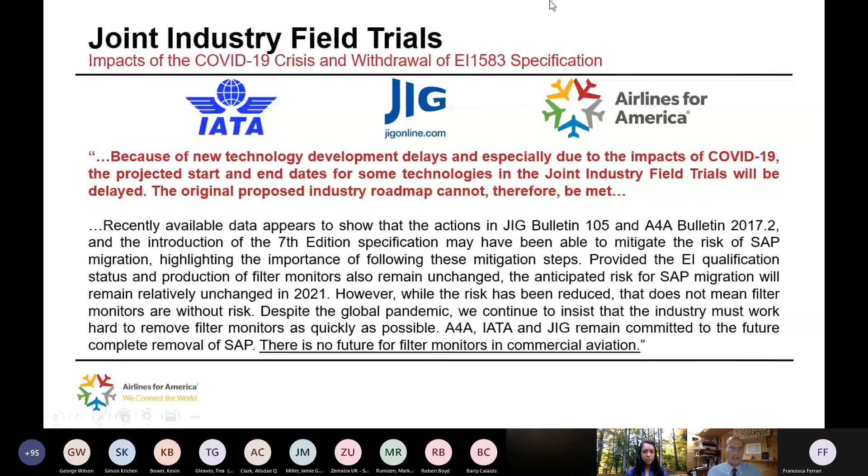Okay, thanks very much, Amy. Great summary, and it's obviously a pretty difficult area from the technology perspective - you can't evaluate systems if there's no fuel going through them.

The agenda here is just looking at what the general decision principles are for moving away. Amy mentioned a couple of different technologies. We are putting a lot of effort in Shell to implementing the electronic water sensor and dirt defense filter, so we'll talk a little bit about that. Then I'll go through the process of implementation and give you some idea of the timings needed for these rollout phases.

So really, the first process is to decide what you're going to do to remove filter monitors. As Amy said, filter monitors don't have any future in commercial aviation, and we need to be looking at the options to move away from them. A lot of people are looking at the work happening in the industry to improve new technologies that might drop in, but at this stage we're left with only 2 approved alternatives: dirt defense and electronic water sensor, or a filter water separator.

As Amy pointed out in her presentation, if you have a wet location, it would be sensible to fit an EI 1581 filter water separator if you haven't done so already. It's interesting to note that with filter monitors, if you have a wet system, they're not very practical in their own regard because they don't have much capability of removing water at all. So we're anticipating that wet systems, if not moved over to 1581 already, would be moving over to 1581 type technology.

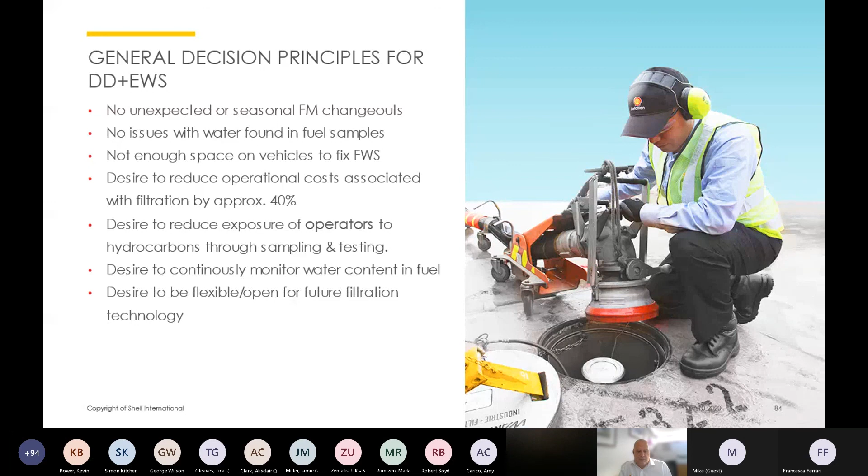One of the hazards or concerns associated with that is the accumulation of water on the upstream side of the elements. That can be drained using operational procedures, but we're preferring to put a sensor in there as well so we've got early warning of that too. So we're effectively installing two different sensors, a downstream part per million type sensor and a bulk water sensor in the vessel.

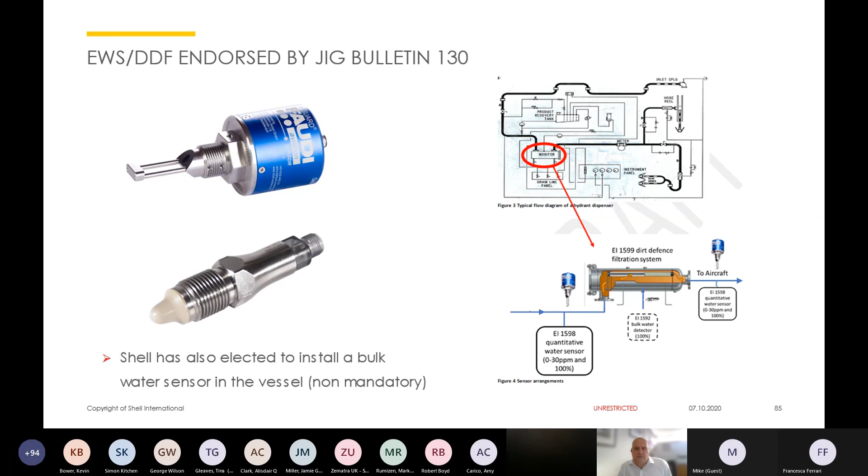Interestingly, when you look at approvals and inclusion of equipment into standards, the standards bodies always say it's up to the user to approve the equipment. So we've been quite diligent with that. We've done a lot of our own testing, much of it lab testing on flow rigs simulating fueling flow rates. We're fortunate in Shell to have that capability. We've deliberately put emulsified water in there at different flow velocities with different amounts of water, looking at whether that changes the water morphology, looking at bulk water, and combinations of dirt and water to see if the sensor still accurately detects water rather than being distracted by dirt. We've also looked at different additive concentrations and their effect on water dispersions. All of that's been successful.

We've also extended that outside of the rig environment into large-scale representative testing of equipment. Simulated hydrant work, where we've used emulsified and bulk water, again using a hydrant cart. With refuelers, we've looked at how water might get into a refueler once it's been filled, through things like water ingress through manhole covers and the pump suction pipework. We've effectively simulated that and demonstrated again that we detect it every time with the sensors. So we're pretty confident this stuff works.

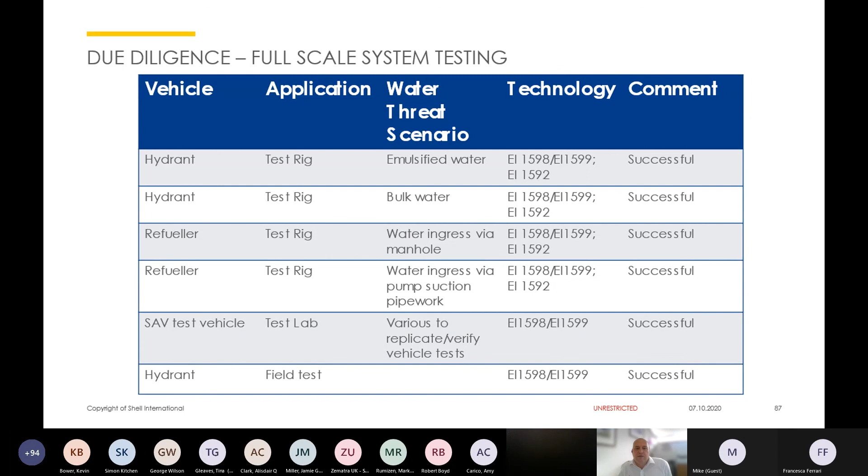So what does the implementation process look like? We've broken this down into three phases in Shell. Phase 1 is installing the sensors themselves. Phase 2 is operating those sensors with existing filter monitors. The final phase is changing the element type to dirt defense, so we're operating with dirt defense plus the sensor. We're doing that because it's a learning process.

As Amy said, there are some slight changes in the practical approach to how you operate these systems, so we're introducing these in stages. That helps both the documentation and management of change process, as well as familiarity with the equipment while using this second stage of implementation.

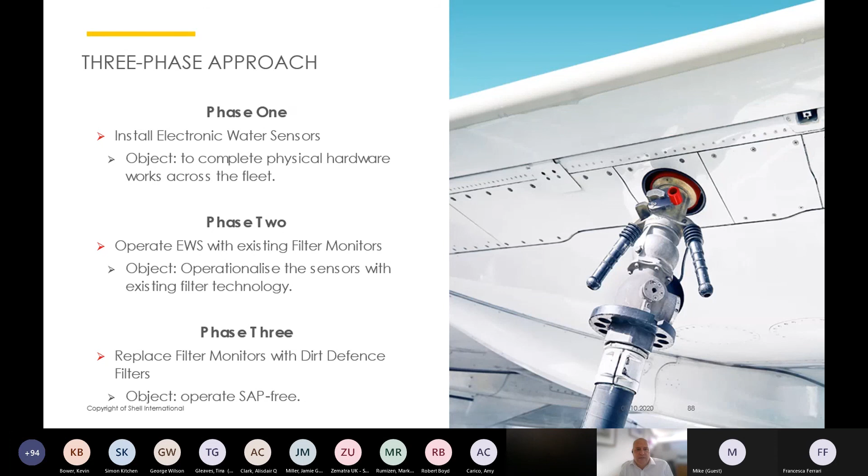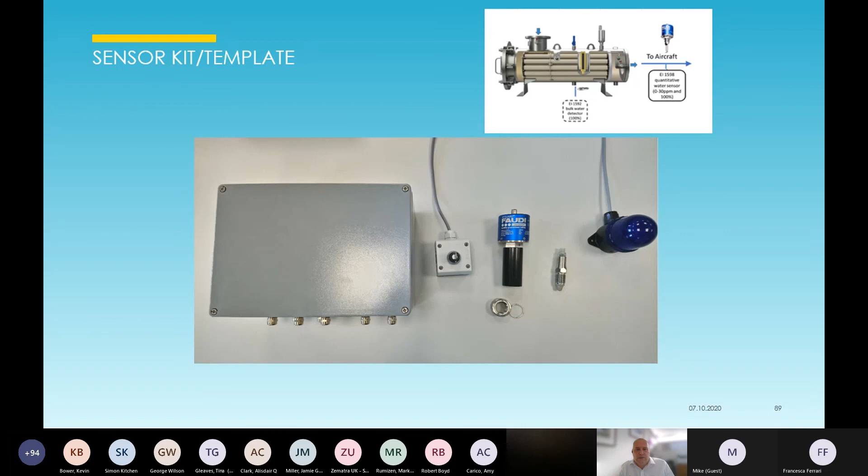This is the equipment that goes in there. There's essentially a control box, and you can see the blue AFGuard sensor. We've got the bulk water sensor, a connection through to the pump or the valve, and an indicator light as well. So it's relatively simple in terms of the equipment that needs to be installed on the vehicle, with a relatively small footprint.

So what do we need to do for Phase 1 installation? We need to decide that we're going to fit these sensors. For those of you who haven't started engaging with this conversion program yet, I strongly encourage you to at least start planning this. You need to plan the CapEx, how much it's going to cost, identify certified installers—positioning of the sensors is important, so who is certified to do that—and if that's not possible, what training is needed for staff to fit these sensors and the adapters into the pipework. Typically it takes about 3 to 4 days per vehicle.

So planning that rotation of those vehicles out so that you're not embarrassed by a lack of vehicles at a location. Of course, COVID is helping us with that at the moment because we don't have much demand for fuel, so it's actually helping us through this conversion process. Having a project plan around this, where what's the staging in which country, in which locations the conversion process is going to happen, what's the transition around that, and then how do we implement that change.

So next slide, please. This first slide is really all about the planning and installation process. The second is then turning the operations on, so turning the sensor on but with existing filtration equipment. And that then starts to require lots of changes to the standards and training that you're operating to.

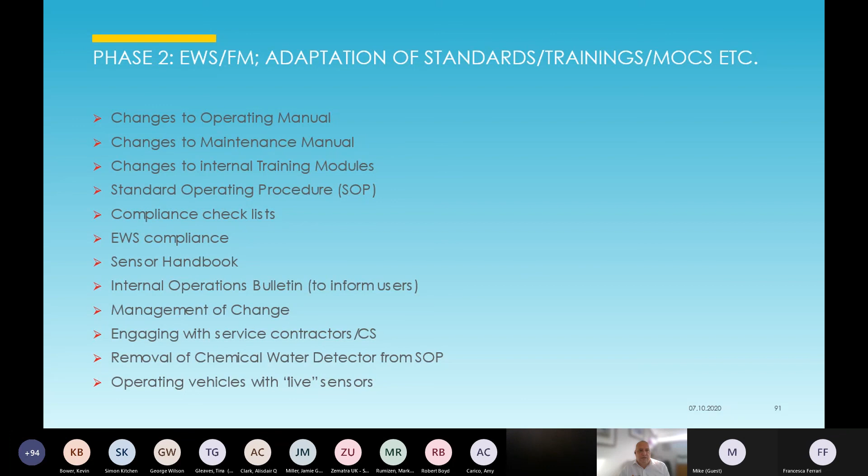Final stage is just simply swapping the elements out. So we're changing from when we've got used to the operational practice, we're changing from filter monitors out to dirt defense filters. So relatively straightforward.

It's then changing—there's an information piece that needs to go out to the users. We've actually been communicating quite aggressively, but quite freely with our customers on what we're doing here, so that they're not surprised when they turn up and find that we're fueling with dirt defense plus sensors. And that's really because we're sort of on the leading edge of this change process, so it might be the first time that airlines have arrived and seen this type of technology. So that communication piece is really important.

And there's some practical things like changing the data plates on the element vessels and such. There's the test procedures that are in place. There's testing on site using a loop tester to test the equipment response for the sensor. Every 24 months the sensor gets sent away for recalibration. And on the slug guard, the bulk water sensor, there's a practical on-site 3-monthly test. So incorporating that into the maintenance program for the sites as well.

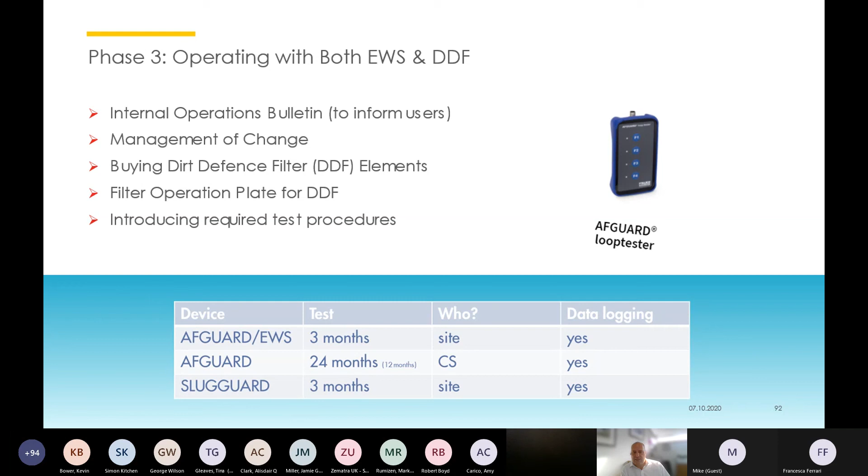So next slide. What does that look like in terms of timing? Well, our timing for this all started for us late last year, so Q3 last year, and we're intending to be operating without filter monitors come the end of this year. So it's something like a 12 to 15 month program for our size of operation. So you can get some idea of what sort of timescales you need to be looking at for yourselves.

But I'd encourage everybody to be starting to consider what they might do in that phase 1 part, where they're looking at the equipment changes that might be needed. And our view of this is that we're not necessarily wedded to this technology forever, but if we've got sensors on the vehicles, then as and when other types of technologies come into play, they either might or might not need that sensor. And if they don't need the sensor, we remove it. So we are ready for any type of technology change at that point.

The next slide, please. That's all I had. It's effectively just looking at the operational process of then changing filter elements out, and I'll take questions either now or Mike maybe at the end, I don't know.

Yeah, fantastic, Rob. Very comprehensive, and it's a lot of attention to detail in terms of implementing that process.

In fact, from a UK perspective, it's a shame they didn't put you in charge of the UK test and trace system, which by comparison is running like a fiasco.

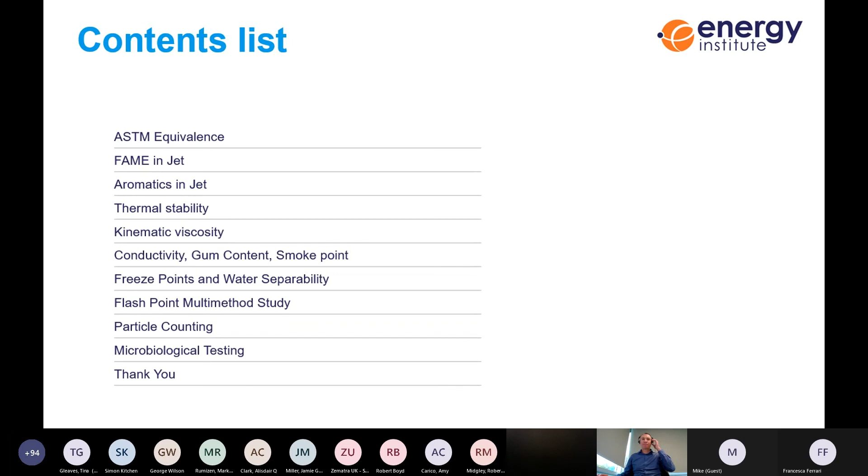There's ongoing work with ASTM to ensure that critical methods remain joint. There are 14 joint EI-ASTM aviation test methods, so there's regular dialogue between the Energy Institute and ASTM to make sure these methods remain equivalent. They're critical for use in international trade and specifications. Within the EI, we have a steering group established to have oversight of the joint test methods.

We have a definition of the technical equivalence used to undertake the reviews, which is also used by ASTM. Reviews are shared with ASTM, and regular meetings are held between EI and ASTM staff. We're working on an MOU for how joint methods are managed, so there's been a lot of work in this activity in the last 12 to 18 months.

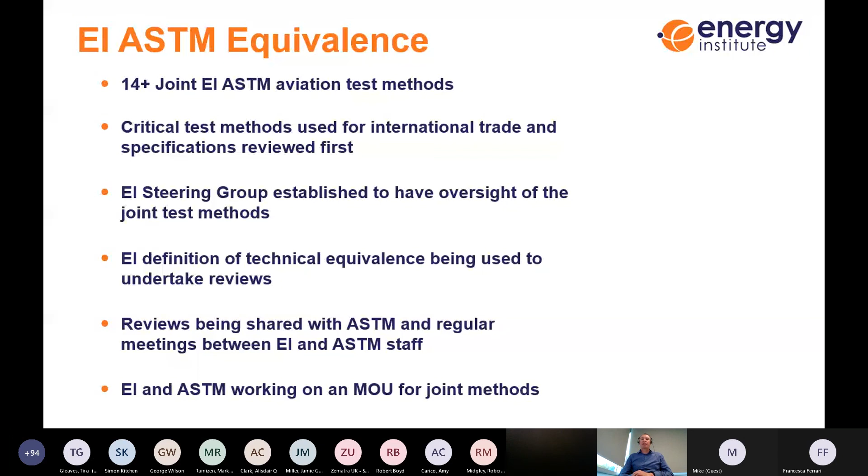We're still working on some of the FAME methods, the referee method IP585, to expand the scope to allow higher levels and encompass low carbon methyl esters. This work has not gone as quickly as we would have liked, but we're still trying. We're now in the process where we've rechecked some of the samples used in the original ILS, and they've been found to be stable.

We're planning to have an ILS, which will probably run now into 2021, when we can move samples around a lot easier and labs will have the capability to do the testing, because a lot of labs are working on reduced resources at the moment.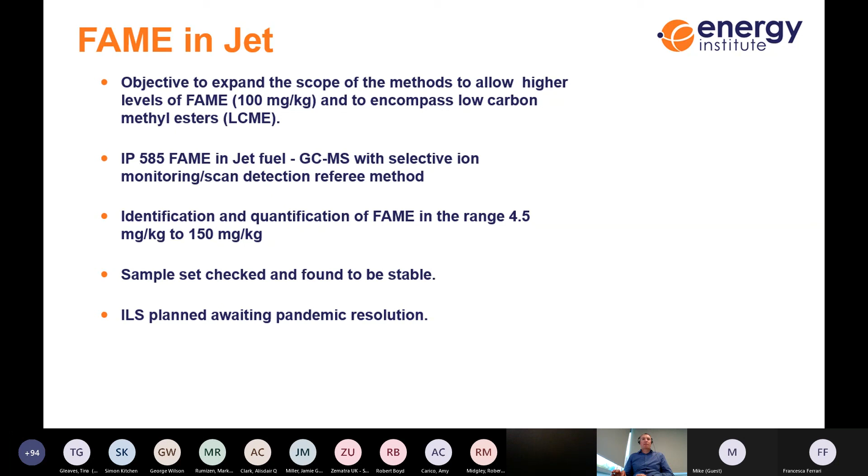In terms of the other FAME, the HPLC method - the precision with the higher scope, 3 to 140 milligrams per kilogram, is not as good as the previous ILS due to this extended range. So the method is being split into two parts: Part A for low level for refineries, and Part B for extended range. Unfortunately, the low carbon methyl esters cannot be detected by the HPLC, and that's detailed in the scope.

Aromatics - as George said, there's a lot of work going on in ASTM about introducing new methods for measuring aromatics. This is the first method that was developed after the FIA.

This is Aromatics by HPLC, the jointed method IP 436/D6379. There was an ILS completed, a research report, and the method revised to increase the scope to cover the determination of naphthalenes. There's improved precision for total aromatics, and now there's a precision established for naphthalenes that's close to D1840.

The ASTM method is subject to a ballot to ensure equivalence, update precision, and address the negative votes that were received, and hopefully this will be finally resolved within Q4 2020. Once that's completed, there'll be a proposal to potentially use IP 436 and D6379 to measure naphthalenes as well. That proposal was made a few years ago, but received a number of negatives, and we'll move that forward again hopefully in 2021.

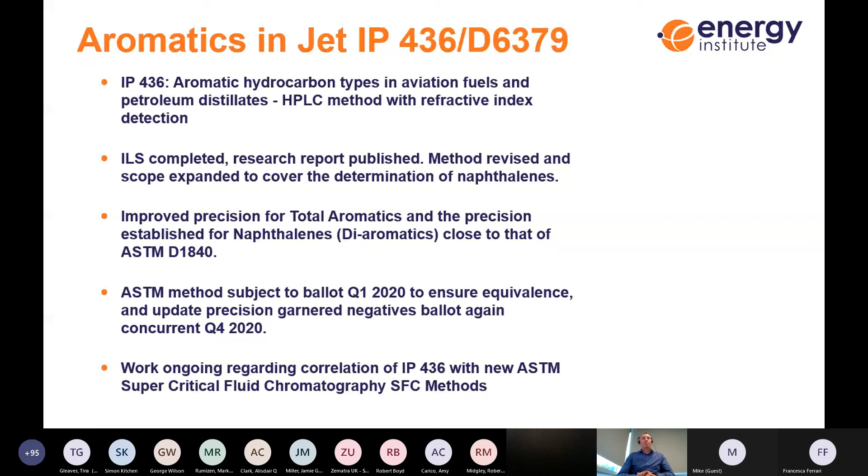There's work ongoing for a new method in terms of correlation with IP 436 with the new supercritical fluid chromatography methods.

Static dissipator - one of the actions that came about was that as a new static dissipator additive went through approval in ASTM, there was a requirement for a method to measure that additive. The method detailed in the specifications at the moment couldn't be used, so initially there was going to be a separate method developed for the new static dissipator.

This new method is now going to be able to measure all the static dissipators listed in the specification. The method is being validated at ASTM for equivalency, and there are some typographical errors in the current version. Sorry, this is the current method for the current standards that's been balloted.

This is IP-PM-FB, for the Kerojet 8118. The scope has been changed to include the new static dissipators, and is at the balloting stage at the moment. An ILS is being planned. The aim would be to have one method that could test for all static dissipators in jet fuel.

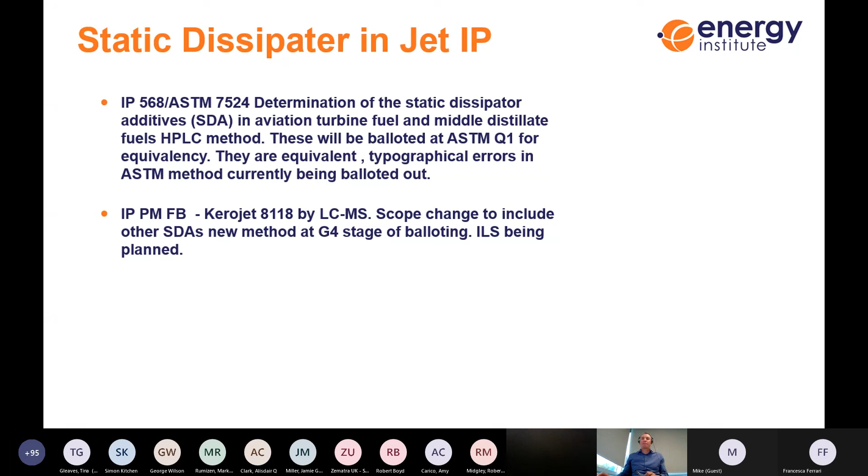Next slide. There's been discussion from George about what's going on in D3241. There's a lot of activity. I think we're on a third issue of 3241 this year.

IP323 has been updated to include interferometry, ellipsometer procedures, and tube rating, to maintain equivalence. However, it still needs to be updated again after the major change to D3241, which removed the gear pump models from this method. That is ongoing. It's one of the critical methods we've got to make sure remains equivalent between ASTM and IP, but there's a lot of work going on within D3241.

Next slide, please. Kinematic viscosity, IP71 and D445. This has been a long program, going on for a number of years. There was a joint funded ILS on jet fuels completed, a study that included all the different types of fuel: Jet A, Jet A1, the semi-synthetic blends, JP5s and TS1 fuels. The idea was to look at the manual method for minus 20.

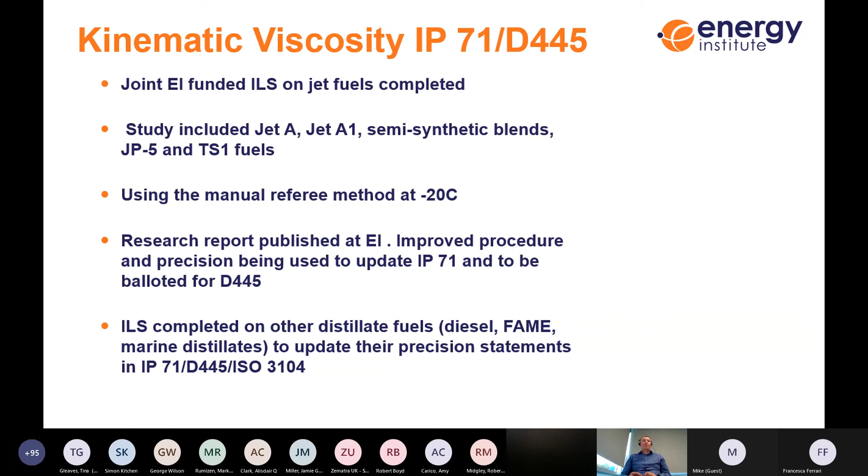The research report has been published, and the improved procedure and precision is being used to update both the IP and the ASTM method. The ILS has also been completed for the distillate fuels to update their precisions as well.

Again, conductivity, there's a lot of work gone on in terms of updating the ASTM D2624. IP274 has been updated to maintain equivalence with the latest version of D2624, but changes to D2624 are ongoing, so the IP method will have to be updated again.

IP598, the automatic smoke point method, has been updated to maintain equivalence to D1322. And gum content, IP131, the gum content method for light and middle distillate fuels, has been updated with new precision aligned with D381.

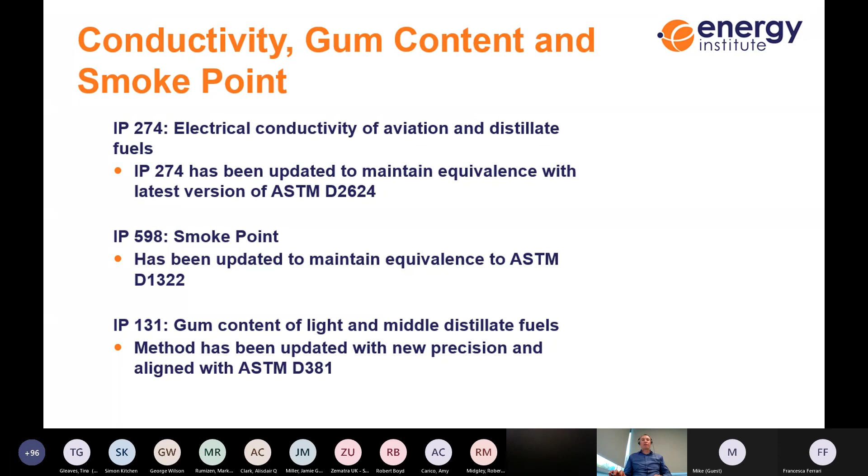Freezing point. Activity hasn't been as great on this, but we've maintained the equivalence between all the IP methods, both the manual methods IP16, IP435, and 529.

And the water separation characteristics of jet fuel by small scale water separation. The method was originally produced by ASTM as D8073, and now an IP equivalent method has been produced as well, with the same precision.

Flashpoint, yeah, there was a lot of work. The joint ILS that Tina mentioned was a big piece of work, where as part of the new precision for D56, there was a request to also develop or identify what the bias was between all the flash point methods. That was a good activity and has resulted in a specification change, so there's been a lot of work on that.

At the moment, IP170, which is actually an EN ISO method, has been revised within ISO CEN, looking at the verification action in terms of how you would verify the performance of the equipment.

ASTM D56 has been balloted following a necessary editorial change and including the precision determined in the multi-method study referenced before. So there's a number of documents within ISO being updated in terms of guidance for flashpoint testing.

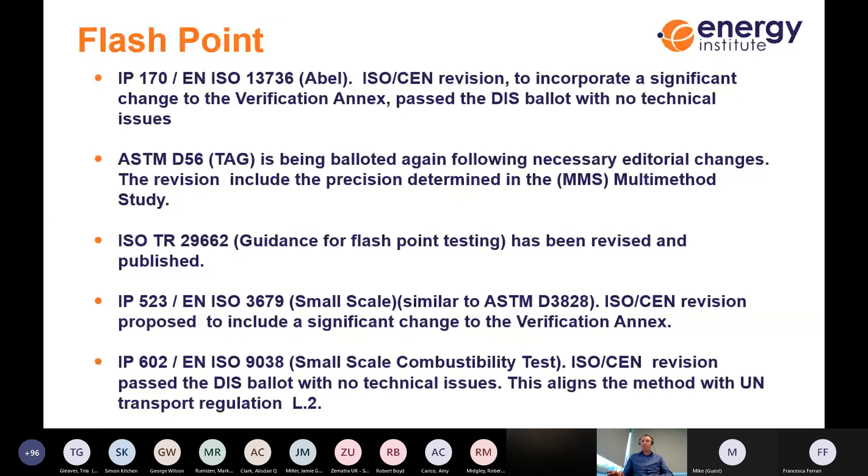IP523, a small scale method, is again undergoing its ISO CEN revision with this method's specifications. And there's an update on IP602, another small scale combustibility test. So a lot of activity in flashpoint.

Just to confirm, and re-emphasize the change in the particle counting requirements in DEFSTAN: this was the result of an EI study supported by the MoD, which compared automatic particle counting and gravimetric methods in 2018-2019. IPA and Resolver were used to eliminate water. The results were combined with industry work to support the proposal for particle counting as an alternative to gravimetric, for possible inclusion, which has now been implemented in issue 12.

So we've seen a lot of timescales of how long things have taken to get done. Some people have been working on this for a long time, and they'll be pleased to see that the limits are now actually embedded into DEFSTAN 91-091, thanks to the study that the EI did a couple of years ago.

And there's a new draft method for counting abrasive particles in diesel fuel.

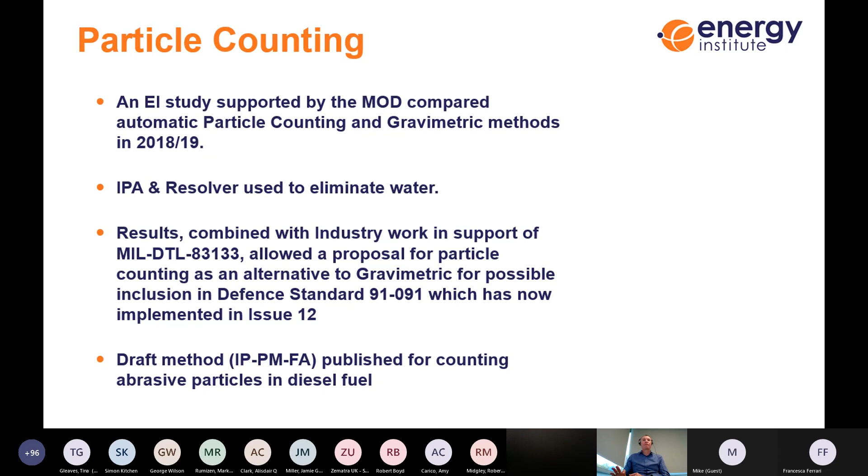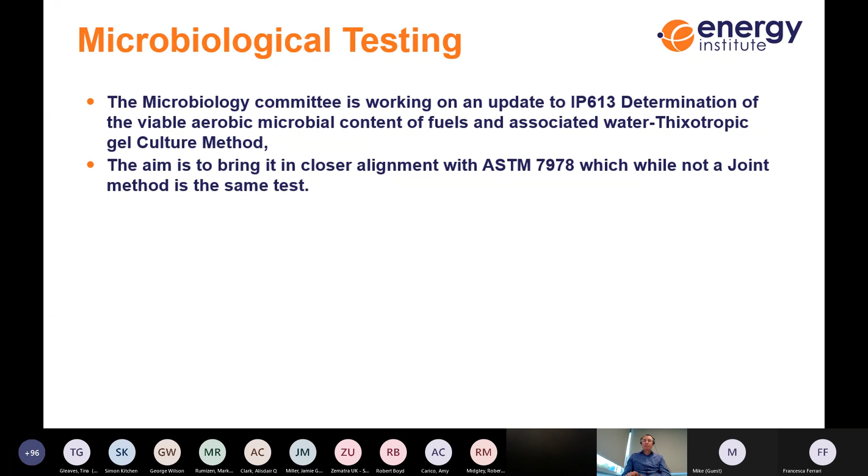The Microbiology Committee is working on an update to IP 613, the determination of viable aerobic contaminant microbiological content of fuels and associated water. The aim is to bring it into close alignment with ASTM D7978, which, while not a joint method, is the same test.

Well done, Kevin, that's really good. I think it really indicates just how much work is going on behind the scenes to underpin the spec. It's not a trivial matter to have that all sorted, and the devil in all those test methods is in the detail. Not seeing any questions on test methods, so that's good, because we are virtually on the button. But it's often the case that we keep the best for last. In big gigs and concerts, the big act always goes on last, and that's what people wait for before they go home. I think this one's no different.

So without any delay, sorry to be last, Zach, but Zach's going to talk about one of the items that Kevin mentioned, the reference fluid to calibrate JFTOT equipment. So over to you, Zach.

Thank you very much, Mike, and thanks to the committee organizers for inviting us to give a status update on the project to develop an ASTM D3241 reference fluid. Most of you should be familiar with D3241 as the standard test method for thermal oxidation stability in most aviation fuel specifications. There were some questions that arose a couple years ago with one of the ASTM cross checks, where significant variance was being reported in the results, and the cause of this variance was unclear. This led the community to the conclusion that they'd like to develop a reference fluid for that specification.

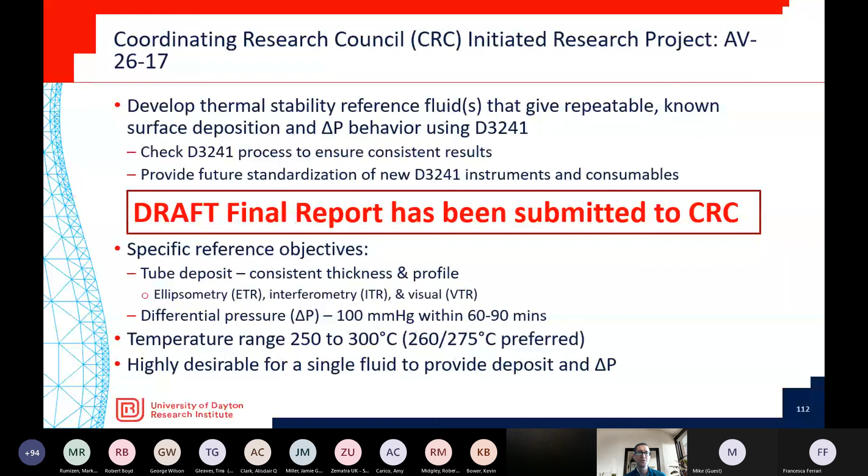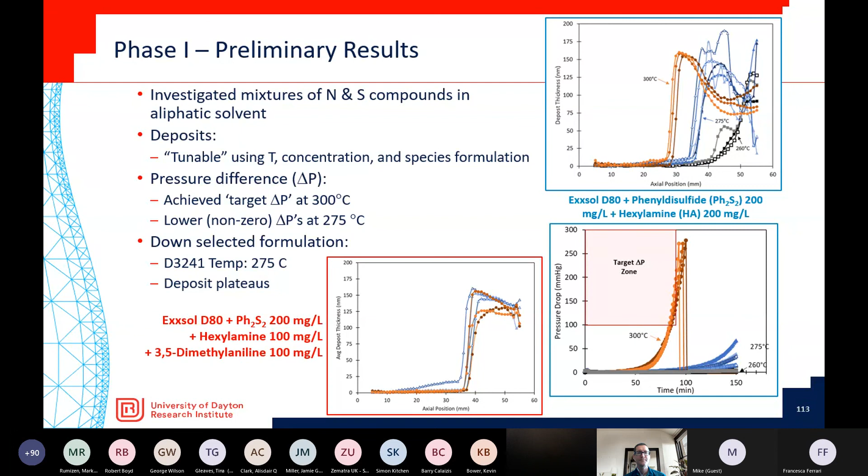The second phase of testing was to take our candidate fluid and really try to prove it out, to see what other factors might influence the outcome. We wanted a nice, stable reference fluid, so we investigated a number of factors. In the end, we did not identify any major concerns with the base solvent or the instigating nitrogen and sulfur compounds. We also looked at an accelerated storage process, heating the fluid to simulate a year's worth of storage to see if there was any impact on the final results, and we did not note anything of significance.

So that led us to the third and final phase, which was a preliminary interlaboratory study. We thankfully had a number of labs that volunteered to run some test fluids. We generated two test fluids at UDRI, a single batch of each.

Fluid A was a higher concentration. This fluid, in the results and report, will be shown to consistently produce a failing deposit, regardless of how that deposit was evaluated or which lab was evaluating it, consistently producing a DP greater than 1. The lower concentration fluid B came out of a request from industry to actually have a fluid that produced a deposit, but a non-failing one, so something below 85 nanometers.

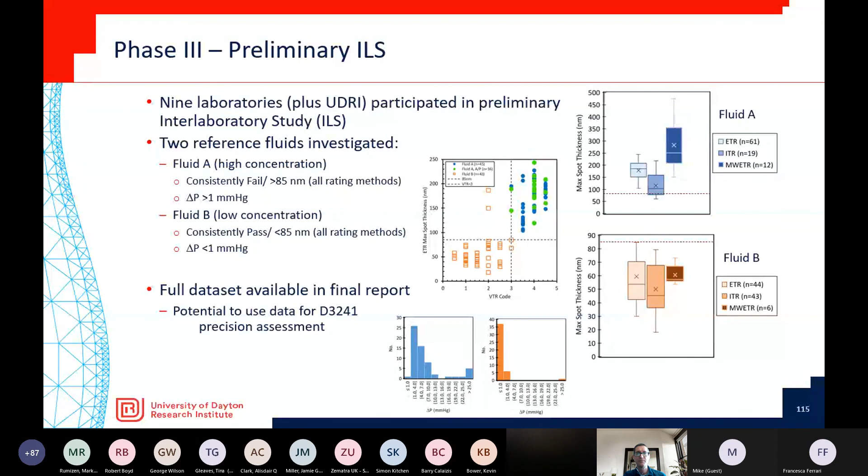I hope there'll be lots of interest about using this data potentially to assess precision for D3241 itself. Next slide, please.

So really, there's the whirlwind tour, just letting everyone know that the final report has been submitted. I believe we were successfully able to develop a reference fluid for D3241 using some real fuel chemistry. Organonitrogen and organosulfur compounds were the instigating compounds. We've got some recommendations for a high and low depositing fluid to be run at 275 C.

We were able to meet the original DP target with a fluid while operating the JFTOT at 300 C. I think if users wish to operate the JFTOT at a lower temperature, say 275, then we'll have to maybe look at perhaps a lower DP as being acceptable there. But that's up to industry to decide what they wish to do there.

And we generated lots of data with the pre-ILS. Quite pleased with it, and actually really looking forward to getting this report out into everyone's hands so that they can decide for themselves. But next slide.

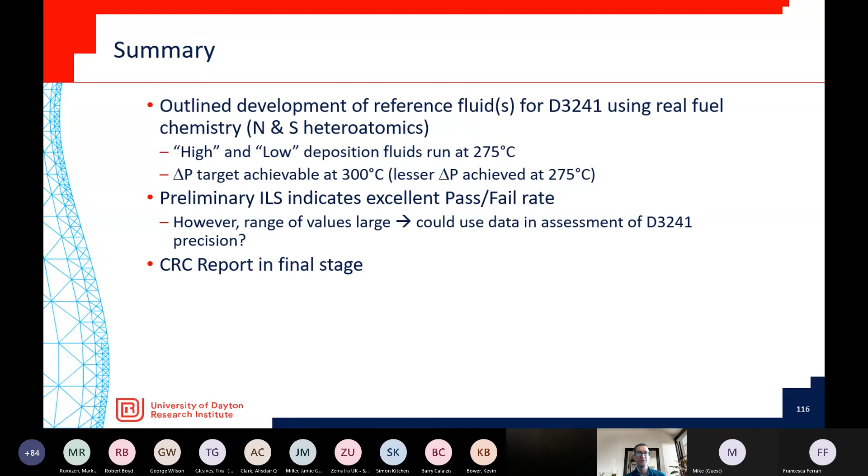And just lots of people to thank. So AFRL for use of facilities, Haltermann Solutions for some very useful discussions, and the various laboratories that contributed, as well as the project panel members and the CRC for funding this. So thank you very much.